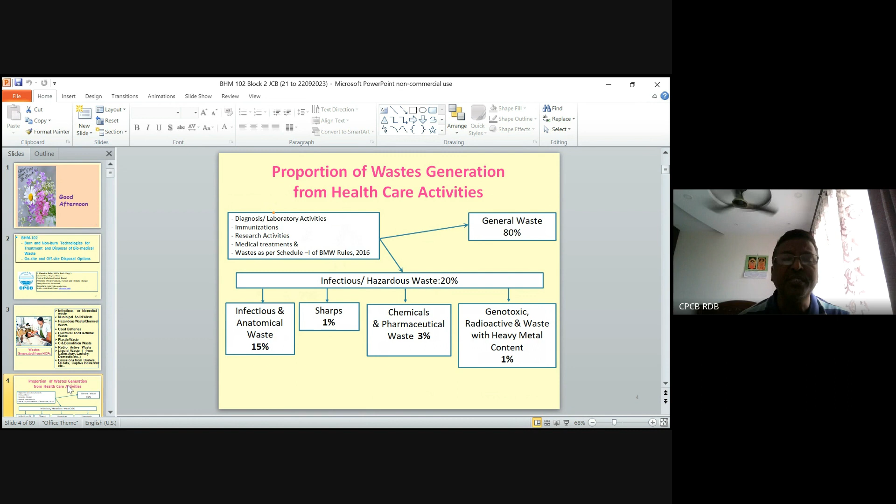In the last class we discussed what type of waste are generated from the hospitals. Generally about 80 percentage of waste is general, non-infectious and non-hazardous, and 20% is hazardous waste. Out of that, infectious and anatomical waste is about 15 percentage, sharps about 1 percentage, other hazardous waste about 3 percentage, and radioactive, burn waste and so on. For the hospital, this is the waste you are concerned about.

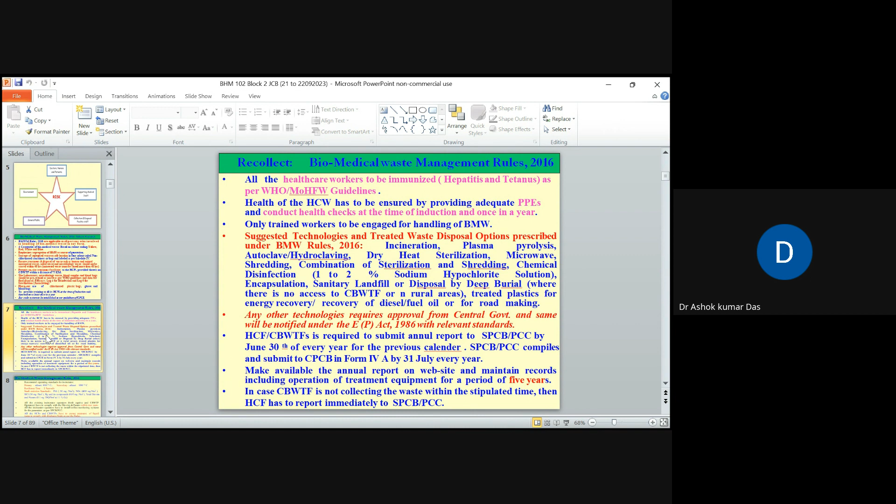Healthcare facilities have to submit the annual report to the State Pollution Control Board by 30th June of every year, as per the prescribed format, Form 4, for the previous calendar year. It is a must.

Make the annual report available on the website in case of all bedded hospitals. At least 30 and more bedded hospitals have to have their own websites. All bedded hospitals should have their own website, and they have to upload all information related to the annual report and other related matters. Records have to be maintained for at least a period of 5 years.

It is a must: in case CBWTF is not collecting the waste within the stipulated time period, maximum 48 hours, the healthcare facility has to report immediately to the State Pollution Board. If the CBWTF is not in a position to take waste from the hospital, you have to inform the State Board of the reason why. Therefore, you are not allowed storage of more than 48 hours of generated waste, especially untreated infectious waste.

All existing incinerator operators have to comply with the dioxin and furans limits within 2 years; 2018 is already the deadline. They are required to comply with the dioxin and furans parameter in stack emissions. The limit given is 0.1 nanogram toxic equivalent per normal meter cube, whereas in case of mercury in stack emissions it is about 0.05 milligram per normal meter cube.

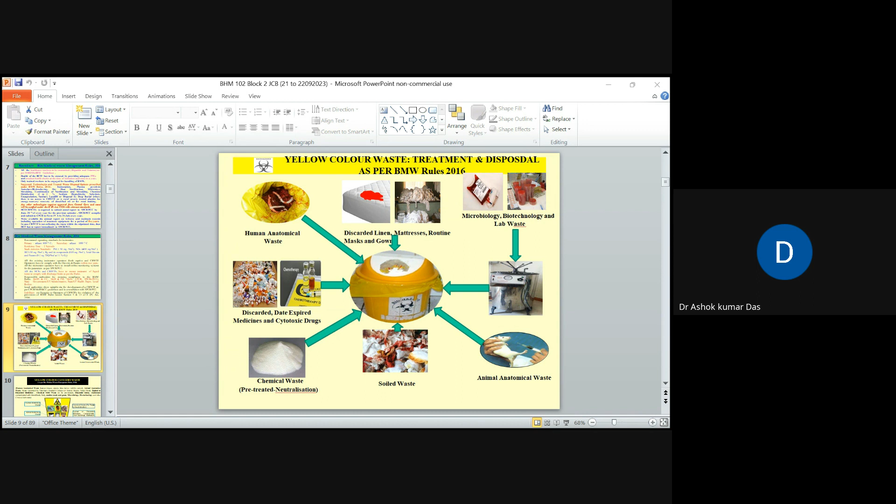We have also seen cytotoxic waste. This is how the yellow color waste has to go into the yellow color bin and bag: it has to be placed into the yellow color bin, like human anatomical waste, animal anatomical waste, soiled waste, blood samples, and blood bags. These samples have to be treated, pre-treated, then go into the yellow bag. Similarly, chemical waste has to be pre-treated by neutralization, and then it can also go into the yellow bag. Expired or discarded medicine waste is to go into the yellow color bag only, except cytotoxic drugs.

Cytotoxic drugs will go separately into a yellow color bag only, but the symbol will not be the biohazard symbol, it will be a cytotoxic 'C' waste symbol. Similarly, microbiology, biotechnology, and clinical laboratory waste has to be pre-treated, and all this waste has to go into the yellow bag only. As I told you, cytotoxic drugs have to go into the yellow color bag, but the label should be a 'C' label, C for cytotoxic.

Red color waste, all plastics, will go into the red color bag or container, but before it goes into the bag or container, it has to be mutilated in order to avoid reuse. All needles and syringes, waste sharps, will go into the translucent container. It should be puncture proof, leak proof, and tamper proof, and only that container should be used for storage of waste sharps.

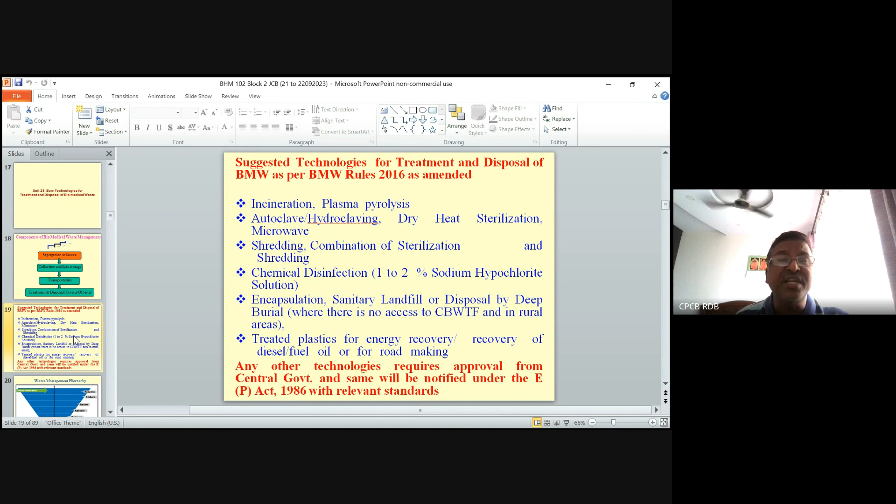The treated stainless steel waste, such as waste sharps which are generally stainless steel, is also recyclable. Stainless steel manufacturers take that waste and recycle it to manufacture different products.

The earlier speaker may have told you how to prevent waste generation as part of the healthcare facility. I don't know whether he has taught this or not, but measures have to be taken by the hospital such that they lead to reduced waste generation, so that we can minimize waste generation in the hospital.

Secondly, if waste generation cannot be avoided, then reduce, reuse, recycle, recover - the 4 R's - has to be done. Reduction can be done by taking certain steps.

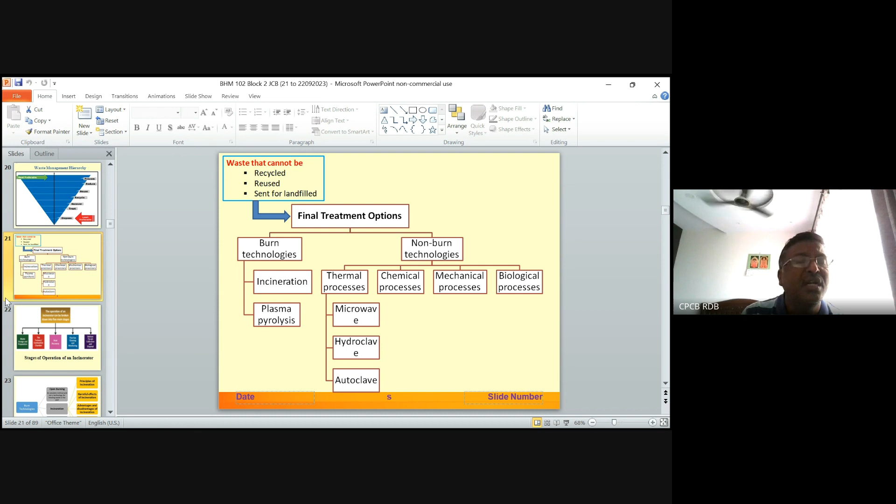The thermal process includes autoclave, hydroclave, and microwave, whereas chemical process means we can use chemical disinfectant. Mechanical process means shredding or combination of shredding and disinfection, or biological processes are also technologies available for us. Let us see what these technologies are.

For treatment of waste by the technique called incineration, the waste has to be prepared. Whatever waste comes from the hospital to the treatment facility will be in color coded bags or containers. First, they have to segregate all the waste depending upon the color coded container. They should not tamper with any bag.

They are not supposed to do that. They cannot remove the tag and they cannot re-segregate the waste at this stage. Segregation should happen only at the source of generation.

Then they separate out all the bags depending upon the color coding. Afterwards, the waste is fed into the incineration. In the incineration process, some heat is generated. Generally, in biomedical waste incineration, heat recovery is not seen anywhere.

Only at one place, somewhere in Srinagar or Jammu I think, I have seen a facility going for heat recovery just to maintain desired temperature, because it is a very cold place. They are generating steam in the process of incineration and circulating that steam into the incineration so that they can maintain adequate temperature, since during winter in a cold place it is very difficult otherwise. The heat recovery they do, they try to recirculate into the system in the incineration process, which is really useful for maintaining the desired temperature.

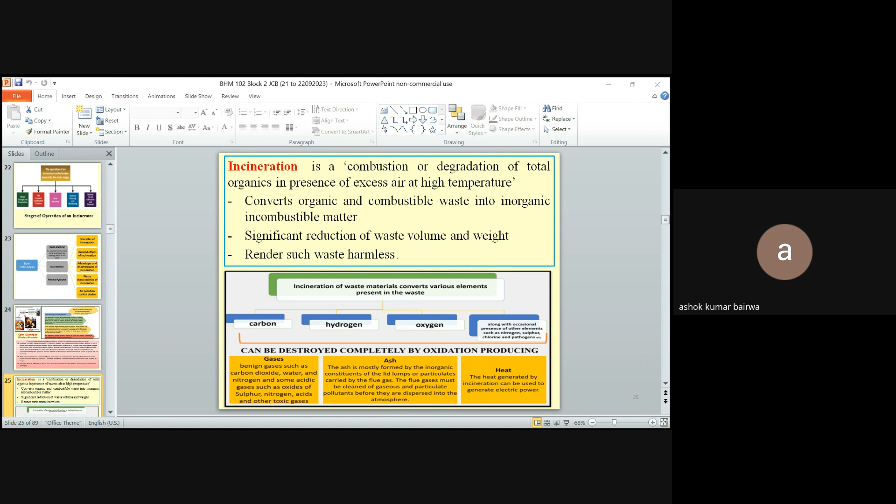Okay, now we are in the burn technologies, non-burn. I just started only, I just covered what was discussed last week. I just started 2-3 slides only, you can catch up from here.

Because of incineration, we also can convert waste. The waste becomes infectious waste turns harmless - it is not already harmless waste, we are converting harmful waste into harmless waste. That's why we go for the incineration process.

As you all know, carbon and hydrogen are matter. Any waste contains this matter - even if you take human tissues, they are comprised of nothing but carbon and hydrogen. Therefore, in presence of carbon and hydrogen, with excess air, this can be converted into carbon dioxide.

In presence of oxygen, if combustion is proper, there should not be carbon monoxide - carbon should be converted into carbon dioxide, and hydrogen should convert into moisture or water, but it remains in vapor form due to the temperature. Therefore, gases are generated, ash is generated, and heat is also generated in the process of incineration of waste.

Now, what is incineration? Just try to understand, this is the simple principle, simple chemistry. I'm not going to give detailed chemistry, it is simple chemistry.

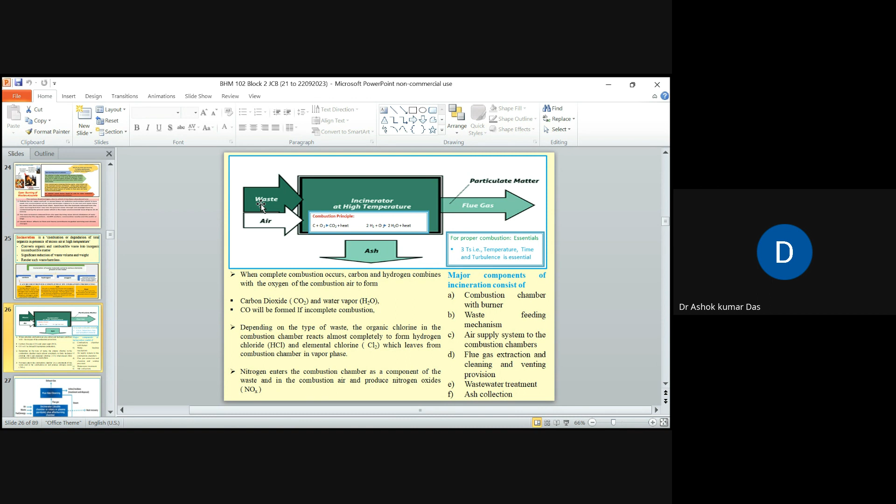This is the waste, whatever is generated. Can you see my arrow, whatever I'm showing? Yes sir, we can see. This is the combustion chamber, and here we are feeding the waste.

In order to combust or incinerate the waste, we require air, oxygen is required, so we are supplying the air also. Waste is nothing but carbon plus hydrogen, let us say. Air means oxygen. Then we are using additional fuel, because waste having high moisture content cannot be burned directly on its own.

Therefore, we have to add some fuel, as well as fire should be given. There will be a jet of fire inside the incinerator. Now, after waste is fed, when the desired temperature is maintained by supplying air as well as auxiliary fuel in the form of fire, the carbon, in presence of oxygen, converts into carbon dioxide and heat is generated.

Carbon in presence of oxygen converts into CO2 and heat is also generated. Now, if combustion is not proper, suppose oxygen required for combustion is not adequate, or if simple oxygen is given without stoichiometric requirement, then carbon, because of lack of oxygen content and inadequate temperature, may not be converted into carbon dioxide. It may instead be converted into carbon monoxide. Then, if carbon dioxide is not generated, it is called incomplete combustion.

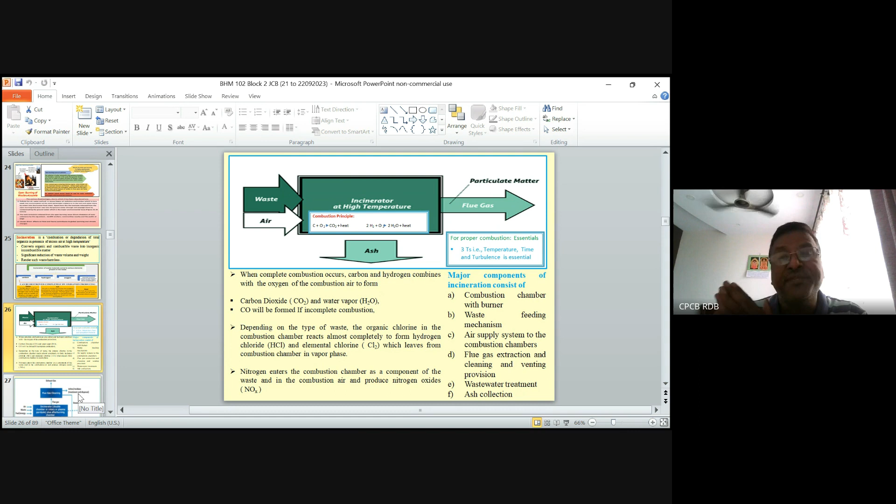Therefore, depending upon the type of waste, the emissions also will be there. If there is mixed waste along with hazardous waste, then emissions will also have hazardous components, hazardous pollutants will definitely be there. Simple example: if mercury spill is not collected and becomes part of medical waste going for incineration, then definitely we can estimate that there will be mercury emissions in the flue gas.

Now, what is the simple system? This is waste. Whatever I want to go for the combustion chamber, I am trying to throw it in. I am supplying air because air is required for the purpose - like we require air, combustion also requires air, so that waste is combusted or burnt easily. And fuel is required, because waste will not have adequate calorific value for burning on its own. Therefore auxiliary fuel is required, and with this fuel, the waste is burnt here.

The process generates flue gas that goes up into the atmosphere. Therefore, before discharge into the atmosphere, there should be a flue gas cleaning system. In the process of cleaning the flue gas, we generate some solids in the form of residue, in the form of semi-solid waste - semi-solid meaning a mixture of water, moisture, as well as solids.

Semi-solid form will be there, slurry form will be there, and flue gas cleaning system, whatever the wastewater is generated from the flue gas cleaning system or air pollution control systems, that has to go for treatment. This wastewater from the APCD, air pollution control systems, has to be treated here.

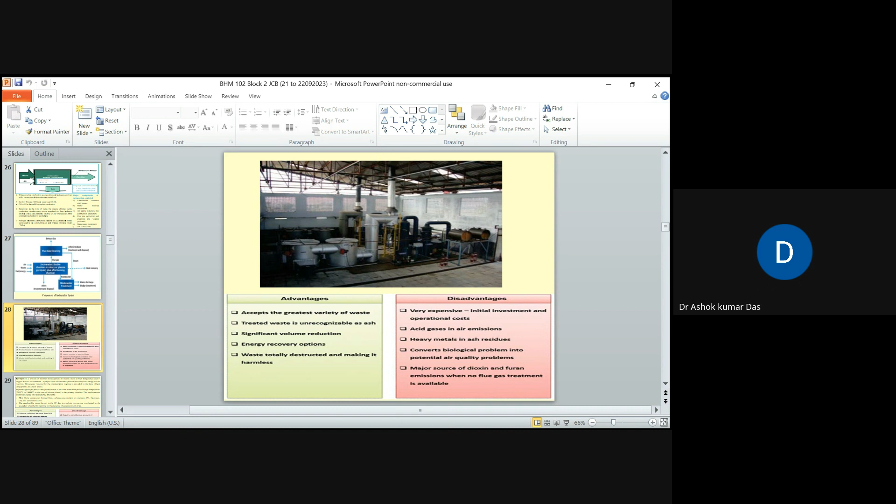Any doubt, please? Any doubt? Okay, sir. Okay. Okay, sir. If you feel any doubt, you can stop me at that point so that you can discuss. No problem.

Advantages and disadvantages are, I think, these are very difficult to read. It accepts the greatest variety of waste. We can take more quantum of waste and treat it easily. Treated waste is unrecognizable as ash. Significant volume reduction is there. Energy recovery is possible, but energy recovery generally does not happen in biomedical waste incineration process. The waste is totally destructed and made harmless.

Disadvantages are: it's a very expensive process, you have to bear the cost. At least you have to bear rupees 30 per kg. Cost of treatment of incineration is around 25 to 30 rupees per kg of waste. Therefore, waste cannot be generated as you wish. You have to minimize the waste generation so that you can minimize the cost of treatment, and also you can minimize the discharges into the emissions, into the environment. You can minimize the impact into the environment.

Generally, the gases generated from incineration are acidic in nature. Because why? Hydrogen plus chlorine reacts with each other in the combustion process and they become hydrochloric acid. Therefore, the gases will be hydrochloric acid. The gas is highly acidic in nature.

Generally, these equipments will get corroded very quickly because they are acidic in nature. Heavy metals will be there depending upon the type of waste, and heavy metals also become a part of ash.

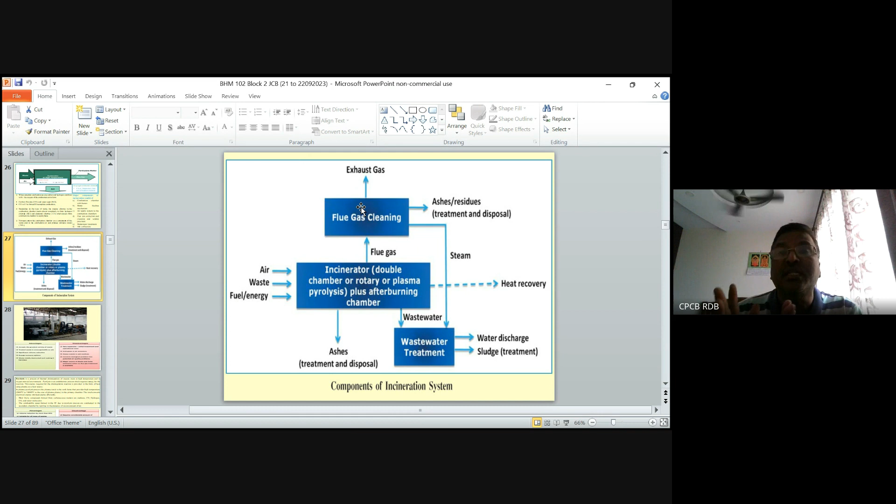Otherwise, the toxic constituents are going to be regenerated, like dioxin furans will regenerate in the APCD also. If you are not reducing the temperature from 1100 degrees centigrade to in between 250 to 400 degrees centigrade, then the reformation of these dioxin furans will take place. That is what we call de novo synthesis.

That means reduction of temperature of flue gas coming from the secondary chamber to the APCD has to be reduced drastically, in a fraction of seconds. Otherwise, dioxin furans will form. Therefore, it is going to cause problems to the environment.

Now, pyrolysis. Both incineration and pyrolysis are one and the same. Whereas in case of incineration, uncontrolled air is there, in case of pyrolysis, whatever air is required for the purpose of combustion is supplied in lesser quantity, that is lesser than the stoichiometric requirement.

For the purpose of combustion, we can estimate the oxygen requirement depending upon the calorific value of the waste. Then I try to control the oxygen supply into the chamber in order to make the waste into a harmless compound. Therefore, this process is under controlled conditions, or starved conditions. Under starved conditions, waste can be burned. That process is called pyrolysis.

Therefore, in the process of pyrolysis, generally the gases generated are methane, carbon monoxide, hydrogen, carbon dioxide, and water molecules. The combustible gases formed in the primary chamber due to pyrolysis are combusted in the secondary chamber. It is one and the same, except here, rather than supplying the requisite quantum of oxygen, we are supplying oxygen lesser than what is required as per the stoichiometric requirement.

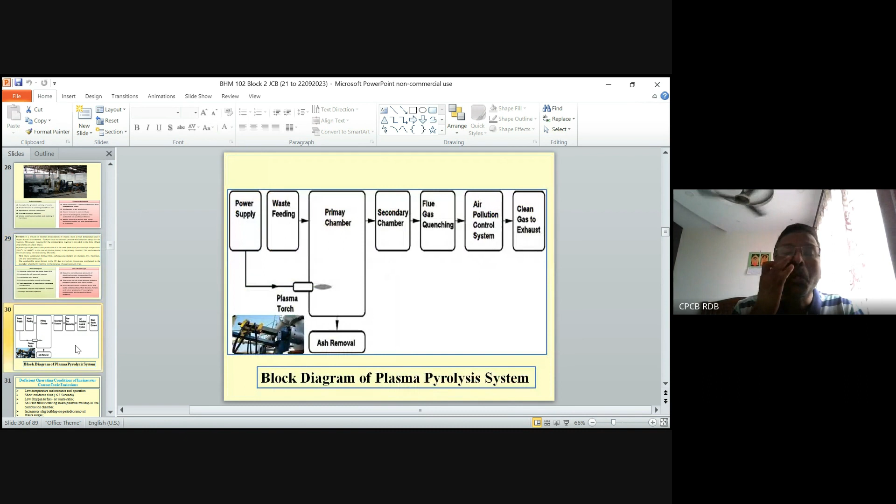Now, what are these stages once more? Plasma pyrolysis and incineration, let's go through it again.

Incineration and plasma pyrolysis are one and the same process. It will have two chambers. In the primary chamber, waste is converted into carbon monoxide: carbon plus oxygen gives carbon monoxide, and this carbon monoxide goes to the secondary chamber, where in presence of oxygen and high temperature, carbon monoxide is converted into carbon dioxide.

Whereas in case of pyrolysis, the primary chamber's oxygen supply will be lesser than the stoichiometric requirement. Whatever oxygen is required, we are not going to supply that much; we supply less than required, and waste is converted into harmless compounds through the secondary chamber.

Plasma pyrolysis is where we supply oxygen in lesser quantity than the stoichiometric requirement, whereas incineration is also a combustion process. Only in pyrolysis you don't give adequate air supply; you give controlled air lesser than required, ensuring the waste is treated and converted into ash easily.

Now coming to this: here is a plasma torch, which is generated. There we are using the burner. Here this is a plasma torch, and the high temperature is generated because of the plasma torch.

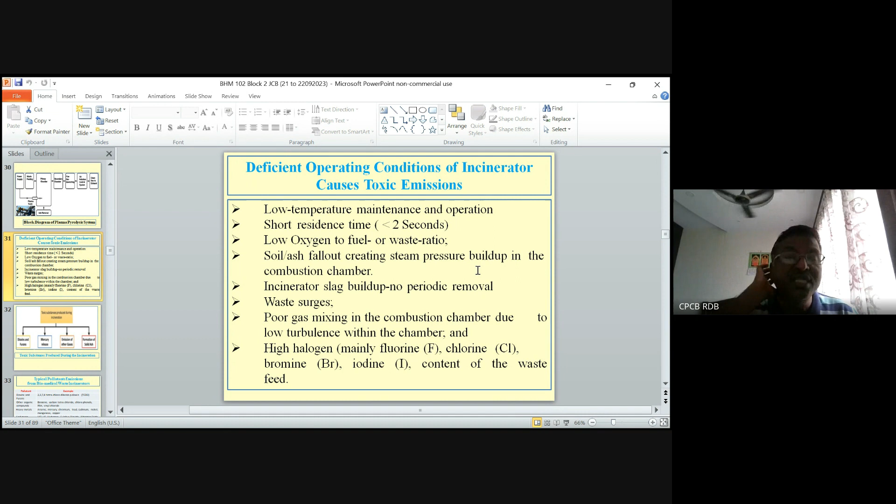Poor gas mixing in the combustion chamber: if adequate mixing is not there, if circulation of air is not proper within the combustion chamber, that causes toxic emissions into the atmosphere. High halogen content, meaning mainly fluorine, chlorine, bromine, and iodine, if present, definitely causes toxic emissions into the atmosphere.

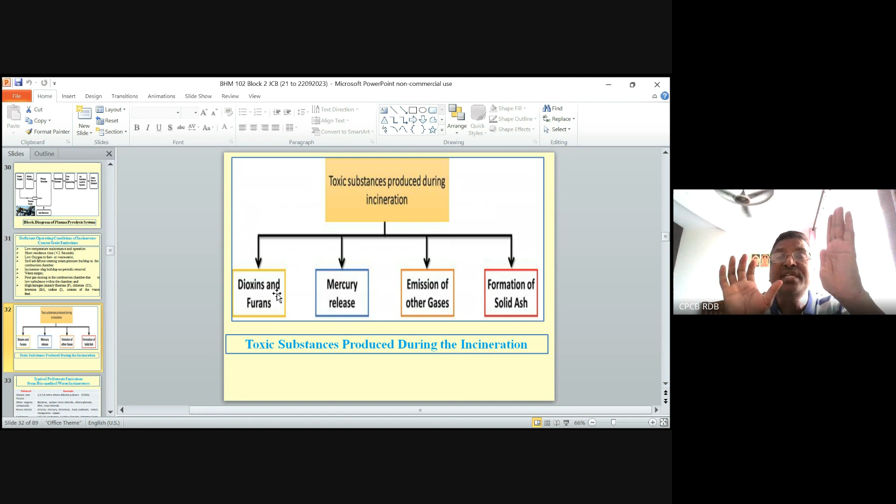These are the toxic emissions we can expect, like dioxin furans. As I mentioned with de novo synthesis, if I don't reduce high temperature flue gases emanating from the secondary chamber in a fraction of a second, then these dioxin furans will be generated as part of the APCD. They will be regenerated in the air pollution control device itself, because if you don't reduce the high temperature flue gas from 1100 down to the range of 250 to 450, reformation of dioxin furans will take place in the air pollution control device itself.

Suppose mercury is present as part of the waste, then mercury will definitely be part of the flue gas. Emissions of other gases will be there because of incomplete combustion, and toxic constituents will also be present as part of the ash. So these are the types of gas pollutants that can be expected from biomedical waste incinerators: dioxin furans, organic compounds, heavy metals, acid gases, carbon monoxide, particulate matter, bottom ash, and residues.

Depending upon the type of waste, if you don't maintain the desired temperature and desired residence time or turbulence, you can expect these problems. And if your control systems are not proper, if your air pollution control devices are not proper, the flue gas will definitely have these parameters. These pollutants will become part of the environment. These are the disadvantages in the process of incineration.

Now, impact of toxic emissions from incinerators: they contribute to global climate change, and they also cause acid rain because the emissions are generally acidic in nature. Therefore it causes acid rain. In preliminary stages wherever there is air pollution, in the preliminary stages of rain, generally it will have acid content.

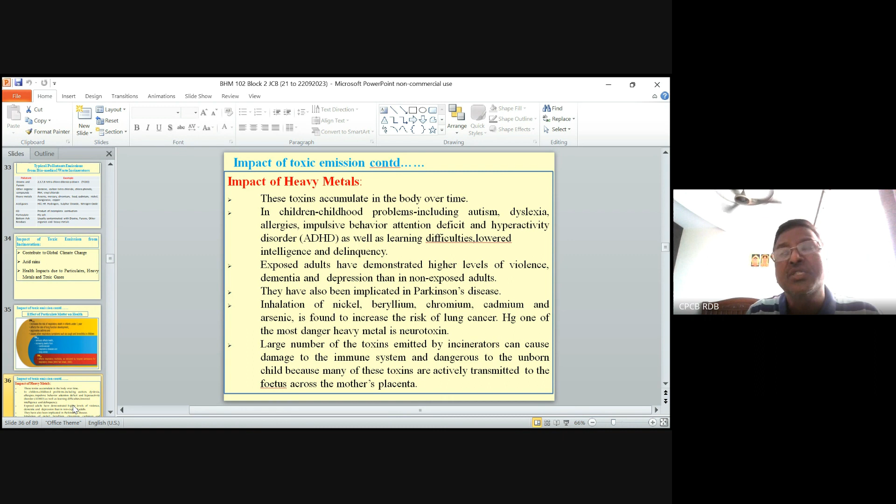Mercury definitely comes into the food chain. Similarly, if ash is not properly disposed of, it contains heavy metals and may cause impact on the soil or land because of the leachate, causing other problems. Depending upon the type of heavy metals, it causes different types of problems if exposed to such things.

Gases also cause impact on the respiratory and cardiovascular systems, and also cause skin and eyes and lungs problems. Eye irritation will be there, skin irritation will be there when there are toxic gases. Side effects such as cough, nausea, and vomiting will be there because of the health impacts of toxic gases.

Incineration - what type of waste can be input? The basic characteristics necessary for incineration include the waste should have a calorific value of 2000.

Can anybody tell me, if waste is not having 2000 kilocalorie per kg calorific value, what will happen? Suppose if waste is not having correct calorific value, what will happen? Not known, sir.

Suppose if waste is not having adequate calorific value - that means waste should be able to burn on its own. If there is a fire, it should burn on its own, that means it has got high calorific value. Paper will have high calorific value, for example petrol will have high calorific value. If there is moisture, then we have to require more and more fuel, we have to give more fuel, then only it can be burnt. Otherwise it can't burn, therefore this is the problem.

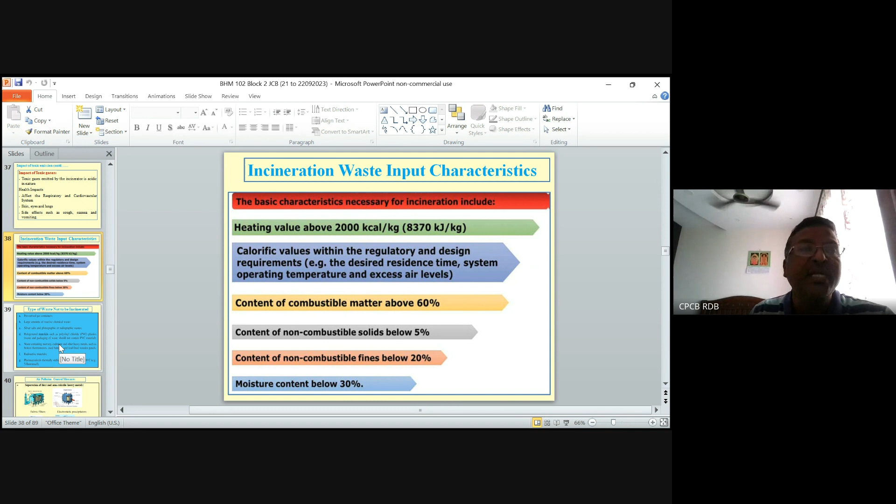If more fuel is consumed, the cost of treatment will go up, and naturally the emissions also will go up. Therefore we have to reduce the cost of treatment and minimize impact on the environment by control measures, which also adds cost. Type of waste not to be incinerated.

Waste like pressurized gas cylinders, large amounts of reactive chemical waste, silver salts and photographic chemicals, halogenated materials such as polyvinyl chloride plastics cannot be incinerated. Otherwise they are going to cause dioxins and furans to be emitted.

Waste containing mercury, cadmium, and other heavy metals such as broken thermometers, used batteries, lead-lined wooden panels should not be incinerated at all. Otherwise it is going to cause mercury, cadmium, and heavy metal emissions as part of incineration. For example, mercury is present in thermometers - if you make it part of the waste, then mercury emissions will be there in the process of incineration. Lead acid batteries definitely will have lead, therefore that also becomes part of the ash content. This sort of waste should not be incinerated at all.

Radioactive waste also should not be incinerated. Pharmaceutical waste that is thermally stable below 120 centigrade has to be incinerated only at this temperature, otherwise it is going to cause problems.

What type of APCD should be there? These are the APCD - the flue gas should have a system like fabric filters. We use the filters, it is mechanical equipment, not like general equipment. Flue gases come through this filter so that all the gases or particulates are controlled, and the gases free from particulates are discharged into the atmosphere through the stack.

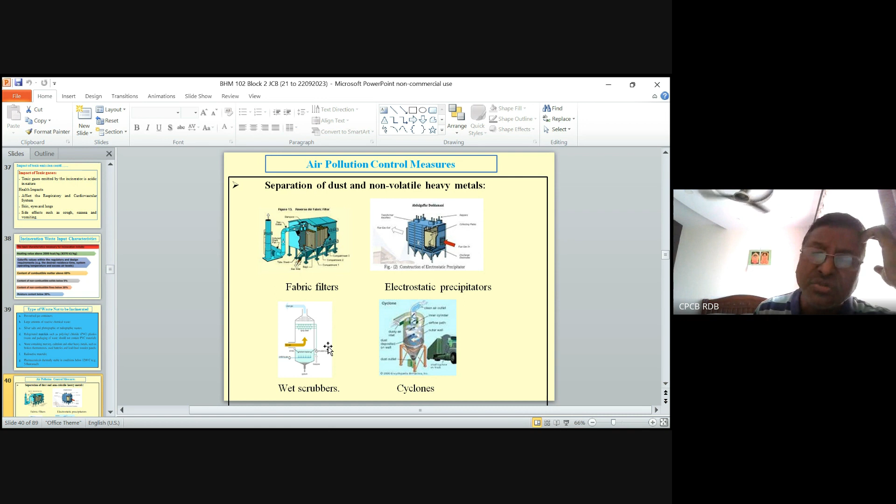There are some wet scrubbers. As I told you, the flue gas is generally acidic in nature, so in order to neutralize it, alkali is sprayed over it. Gases are sent through this from the bottom, whereas from the top, the alkali solution to neutralize the acid is sent - caustic soda is sent, or lime solution is sent. Therefore we can neutralize these acidic gases.

Then it will go to other APC, air pollution control devices - wet scrubbers, that is what we call wet scrubbers, and cyclones. In cyclones, by means of cyclonic effect, the gases will go into a subtler form in the process, and they lose velocity and energy.

In the centrifugal equipment, because of centrifugal force, the higher particulates fall on their own to the bottom. It is a physical phenomenon only, mechanical equipment. Therefore, this is one of the equipment used for the purpose of control of particulates.

Now, how to control acids - acid content, hydrogen fluoride, sulfur dioxide, mercury, and other things. We have a system called the Venturi scrubber. Gases go through this from top, and along with this, an alkali scrubber is given. When passing through, the gas is scrubbed and cleaned. The clean gas goes from the bottom for further treatment.

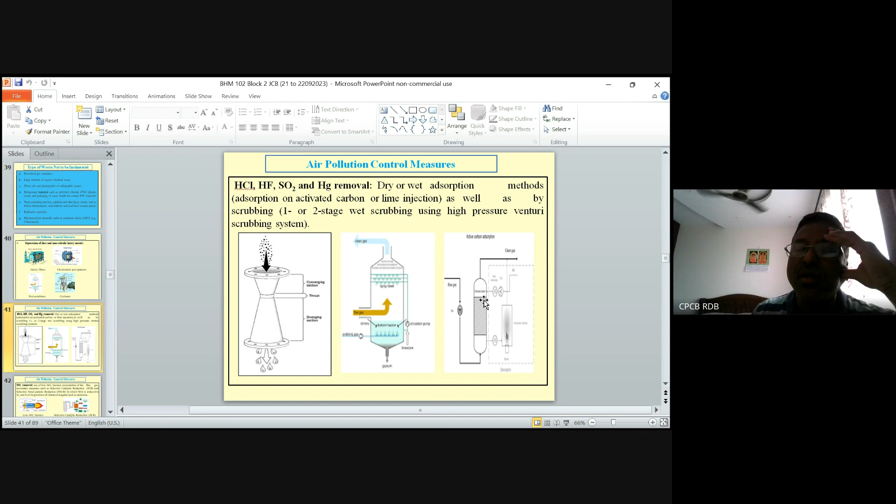Here also, the scrubber is a wet scrubber, as I already told you. An alkali solution is added to neutralize the acid gases. Also, one type of APCD is called adsorbents - activated carbon or activated lime is used when gases pass through this way. All heavy metals, including mercury or dioxins and furans, can be retained here, and the gases free from pollutants can go through and finally discharge into the atmosphere.

These are some of the techniques. I can't tell you everything, but it's a very huge subject. Incineration itself is a very huge subject.

How to remove the NOx? We have to use proper burners - these are called low NOx burners. Oxygen or nitrogen will not be there, low nitrogen will be there. Therefore, in the process when you supply air along with these burners, the nitrogen content will be very low in the supply of air itself. It controls the NOx generated from the combustion process so that it will be very less.

Also, we use ammonia as a catalyst to reduce various pollutants. This is called selective catalytic reduction, where ammonia is used to remove NOx. The NOx is converted into nitrogen and water or moisture by using ammonia as a catalyst in the process of selective catalytic reduction - SCR. We call it SCR.

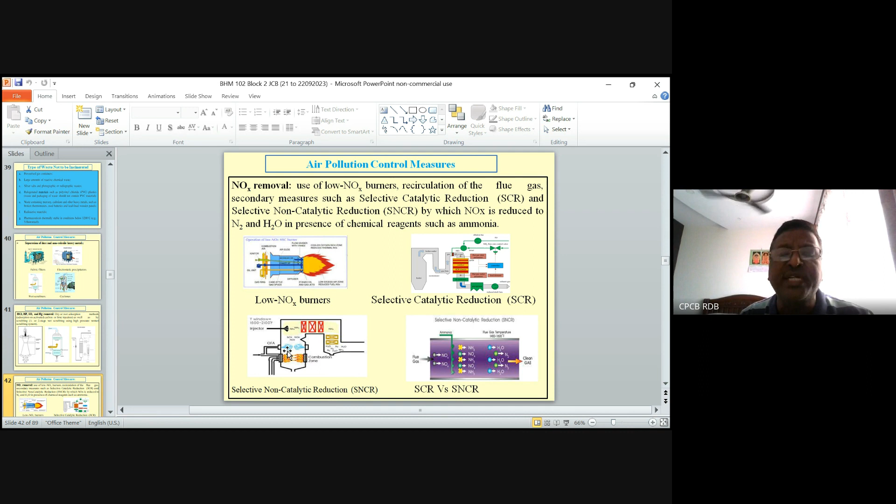Whereas in case of SNCR, selective non-catalytic reduction, only temperature will take care of it. High temperature is maintained and all the gases are converted into harmless gases and it is not going to cause anything. Therefore, these are the techniques adopted for the purpose of control of flue gases.

And reduction of organic matter emissions. Primary measures include limitation of de novo synthesis - by adopting this, we can control the dioxin and furan emissions into the atmosphere.

We have to maintain optimized conditions, meaning temperature, residence time, and turbulence. These three T's - temperature, time and turbulence - if maintained properly, can minimize the formation of PCDD, meaning polychlorinated dibenzodioxins, and PCDF, meaning polychlorinated dibenzofurans.

These are carcinogenic in nature, highly toxic. In the process of combustion, PCDD and PCDF, dioxins and furans, are generated. Therefore, to minimize these organic emissions and furans, you take measures like maintaining optimized conditions, and the flue gas emanating from the secondary chamber has to be reduced in temperature to between 250 to 450 in a fraction of seconds, so that these furans will not be formed.

Secondary measures like dust separation - we use cyclones, filters, everything can be used, and also active carbon filters. Apart from the injection of active carbon into the flue gas systems, that also absorbs the toxic emissions present in the atmosphere. This is about incineration and how to reduce this toxicity.

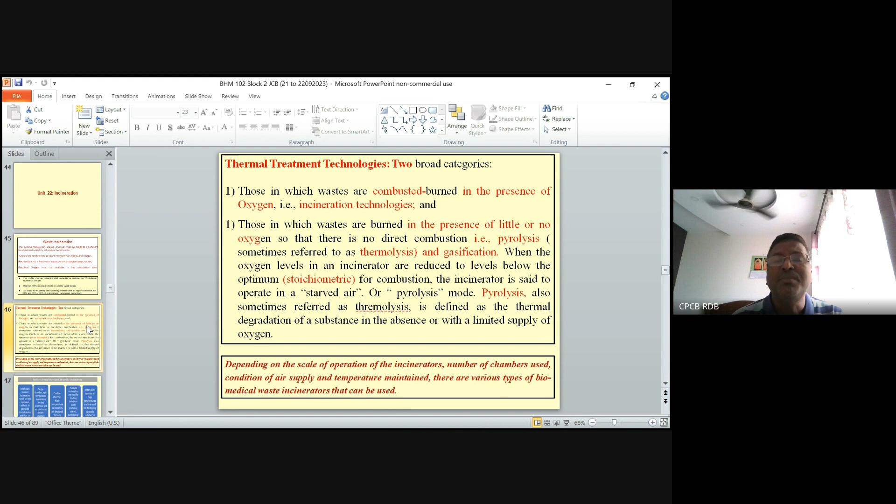So there are two types of incineration. One is conventional incineration where adequate oxygen is given, especially in the secondary chamber we give more supply than what is required. But in case of pyrolysis, the air supply rate in the primary chamber is given very less than what is required in order to combust all the waste. These are the two types.

What are the other types of incinerators? The incinerators are generally categorized into four types: small scale low cost incinerators, single chamber incinerators, double chamber incinerators, pyrolytic incinerators, and finally one more called rotary.

Now what are these single chamber incinerators? If a single chamber incinerator is there, this is the single chamber incinerator without any air pollution control. That means a simple box, not open burning, but controlled burning where he is adding waste and fuel, and one pipe he has kept. It is a single chamber incinerator, but he is maintaining desired temperature, like a lamp.

If you see here, this is a single chamber incinerator. It has got one chamber for waste feeding. This is also a single chamber incinerator only, it has got a burner and a stack pipe through which waste gases go, but it is not a double chamber incinerator.

Why is a single chamber incinerator not at all suggested for incineration? Can you guess now, based on the chemistry of combustion you've heard? If you adopt a single chamber incinerator, what will happen?

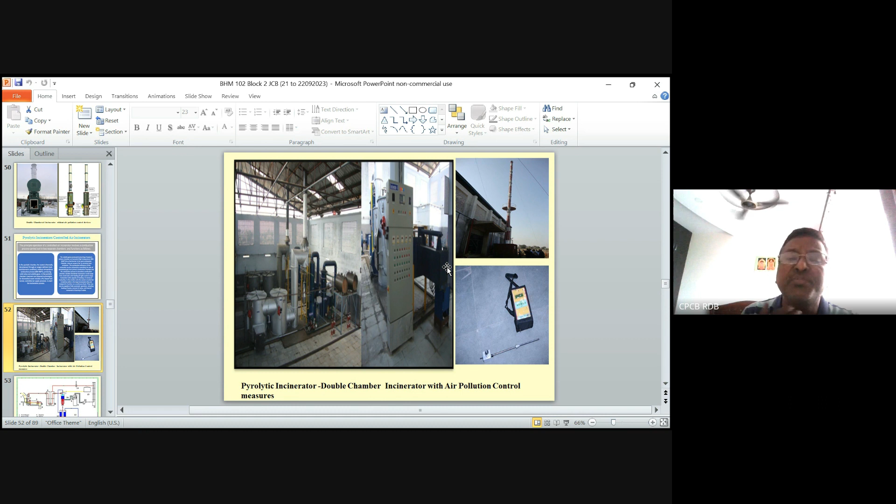These are the automatic control systems. They record the temperature and pressures, and are also connected to a printer. The printer gives directly what temperature is maintained over a period of certain seconds. This is in general, this is the overall scenario. Just to show you diagrammatically.

This is actually a rotary kiln. In place of a rotary kiln, it is also a conventional pyrolytic incinerator, but here, in place of a primary chamber, I will have a rotor, like a drum. It will be rotating. The waste I feed will go into the rotor where it rotates, rolling like a cement mortar mixture or concrete mixture.

The waste is fed, and by the time the waste travels from here to that side, at the end of this point, all the waste will be converted into CO2. The length of the drum will decide how much waste is converted into CO or CO2.

It's the length of travel all the way from here to this place. There's a slight slant for this drum, so by the time the waste reaches from here to this place, all of it will be converted, especially since a burner is also present. Generally, in the rotary kiln, there's perfect provision to convert within the primary chamber itself, and leftover carbon monoxide is converted to CO2.

Then it is taken to the APCD, the air pollution control devices. Scrubbers are there, bag filters are there. Ultimately, the waste is collected, and finally it goes through the stack, which should be above 30 meters in height above ground level. That is the minimum requirement.

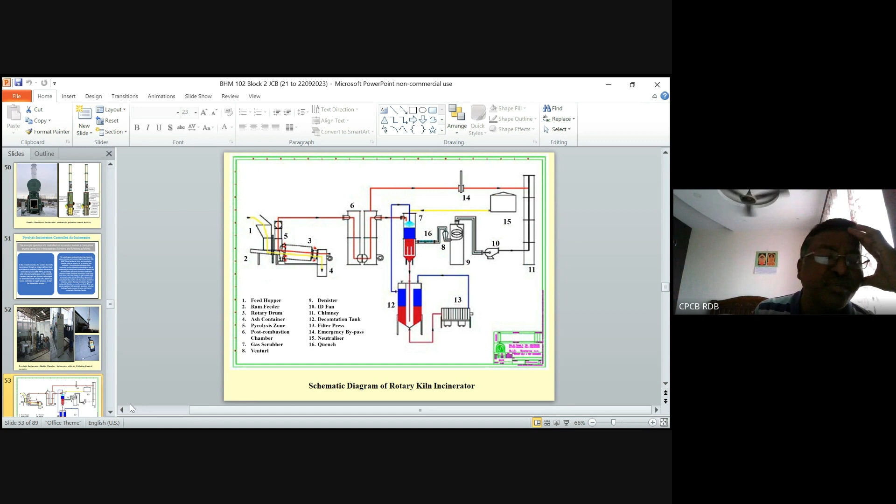Any doubt, please? This is what I am saying. This is the rotor where the waste is fed. From here the waste goes to this end, where the secondary chamber is. Here the waste is converted completely from carbon monoxide, then it goes for air pollution control systems. Finally, I don't see the stack here, but the stack should be there definitely.

Rotary kilns are generally used for treatment of huge quantities of waste. We can operate this equipment 24 hours. If there's any waste, maybe 2 tons per hour, I cannot go for a conventional incinerator with primary and secondary chamber. The rotary is the best one to treat huge quantities of waste, operating 24 hours. So 2 tons per hour means within 24 hours I can treat about 50 tons per day, so I can go up to 50 tons per day.

Wherever waste generation is high, wherever waste has to be treated and disposed of in high quantity, you can go for rotary. Wherever the waste is more than 2 tons per hour, definitely one will prefer to go for rotary. Rotary is the best one for control of emissions also, compared to the conventional two chamber systems. I think this comparison I already covered, so there's no necessity to explain once again.

The temperature to be maintained in the primary chamber is about 800 degrees centigrade. Whereas in the secondary chamber, the temperature to be maintained is 1050 plus or minus 50, meaning 1000 to 1100 degrees centigrade. So the primary chamber you maintain at 800 degrees centigrade, while the secondary chamber is maintained between 1000 to 1100 degrees centigrade. Combustion efficiency.

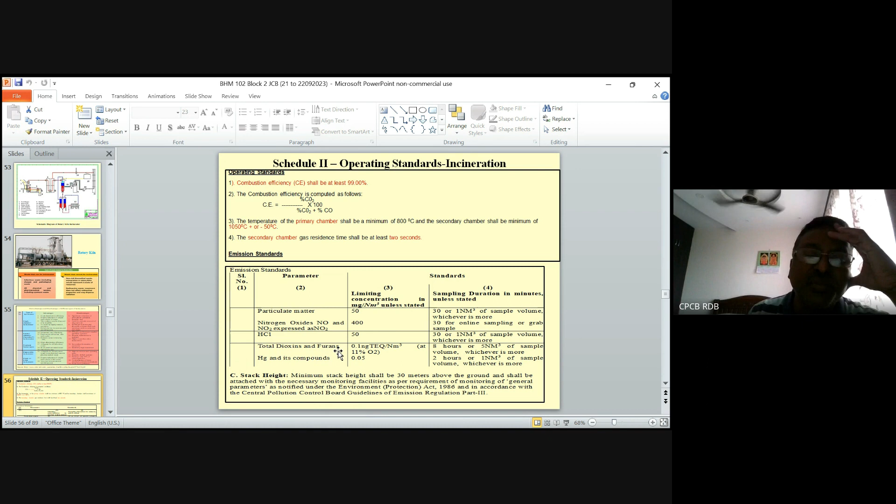The discharge norms for flue gas emissions prescribed under the rules are: particulate matter 50 milligram per normal cube, NOx is 400, acid mist about 50 milligram per normal meter cube, total dioxin furans is 0.1 nanogram toxic equivalent per normal meter cube, and mercury and its compounds should not be more than 0.05. Depending upon the type of waste, the emissions will also vary.

Earlier, thermometers were used, but now thermometers are not in use in most hospitals. Therefore, mercury can generally be complied with from the incineration process. Earlier there were some emissions observed; even I have observed this.

Stack height should be 30 meters. Now, what type of emissions can be expected from medical waste incineration? These include particulate matter, carbon monoxide, dioxin furans, hydrogen chloride, sulfur dioxide, nitrogen oxide, and lead. If lead is there, generally some medicines will have lead, cadmium, and mercury as well. If these are part of the waste and incinerated, these emissions can be expected even from biomedical waste incinerators.

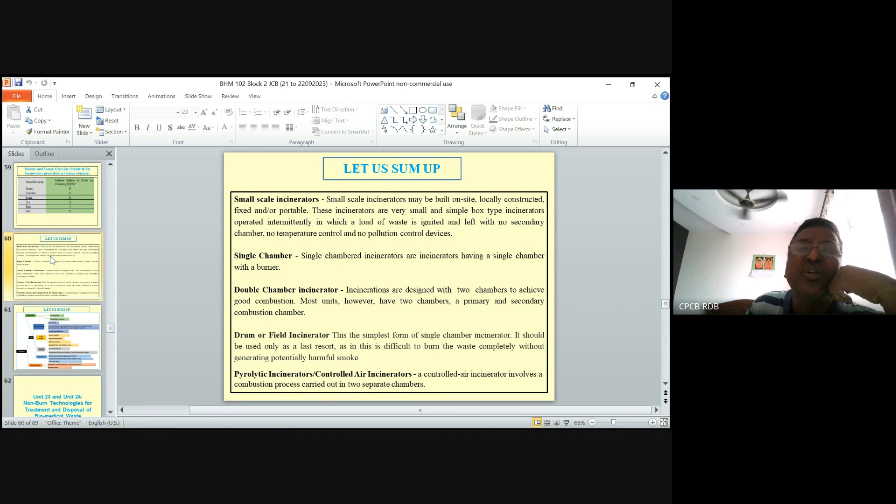Now, just to sum up, incinerators and their types: we have single chamber incinerator, double chamber incinerator, pyrolytic, and rotary kilns.

Waste to energy plants also fall under the purview of incinerators, but biomedical waste generally doesn't go to waste to energy plants. Rotary kiln and pyrolytic incinerators are generally adopted compared to single or double chamber types. Single chamber incinerators cannot be encouraged at all; they are prohibited and not allowed in the country. Double chamber incinerators are also not allowed without APCD, whereas pyrolytic and rotary kilns are allowed as of date. This covers the incinerator process.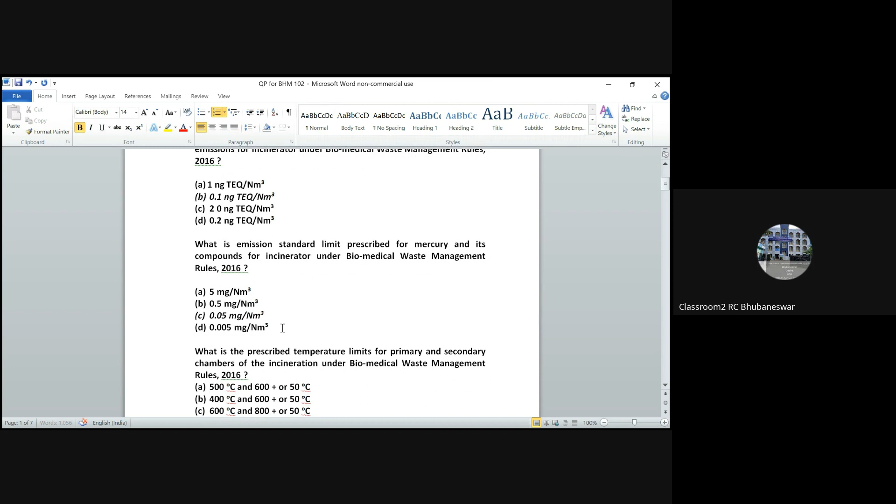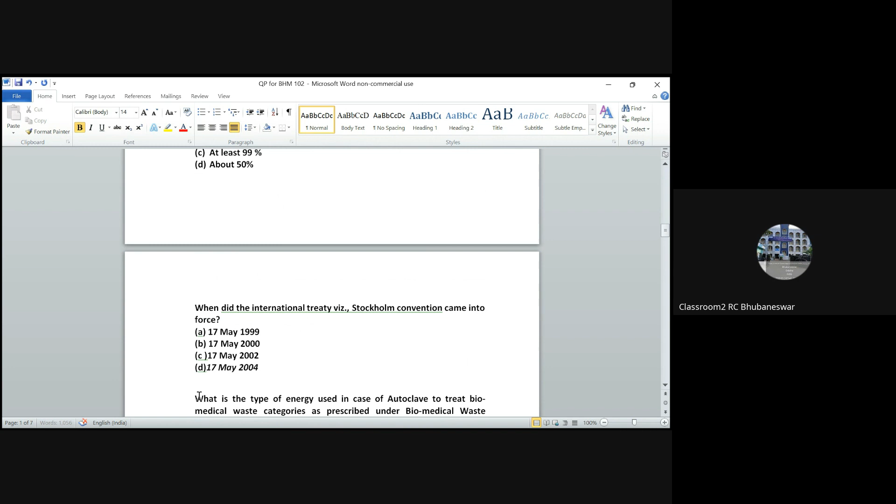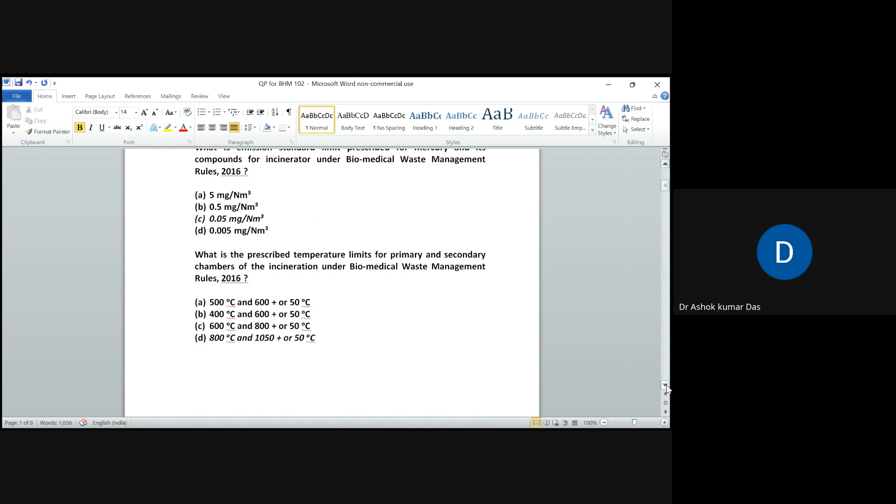What is the emission standard limit prescribed for mercury and its compounds for incinerators under Biomedical Waste Rules 2016? The limit prescribed for mercury and its compounds is 0.05 milligram.

What is the prescribed temperature limit for primary and secondary chambers of incinerators under the BMW rules? What should be the temperature in the primary chamber? 800 degrees Celsius for primary, and 1050 plus or minus 50 for the secondary chamber, meaning 1000 to 1100 degrees centigrade is the limit.

What is the prescribed minimum residence time for the secondary chamber of the incinerator under the BMW rules? What should be the minimum residence time? At least 2 seconds, sir. Very good, at least 2 seconds is the correct answer.

What is the prescribed minimum stack height for incinerators under the BMW rules? 30 meters above ground level is the minimum stack height suggested under the rules.

Biomedical waste to be incinerated shall not be chemically treated, as per BMW rules. Why? First understand the question - why should waste that is going to be incinerated not be chemically treated? For example, a chemical disinfectant like hypochlorite solution - if used for treatment of waste which is going for incineration, it causes dioxin and furans because of chlorine. Disinfectant is chlorine-based, so any waste treated with chlorine that goes for incineration will generate dioxins and furans. Therefore, disinfectant treatment is not allowed - that's the correct reasoning.

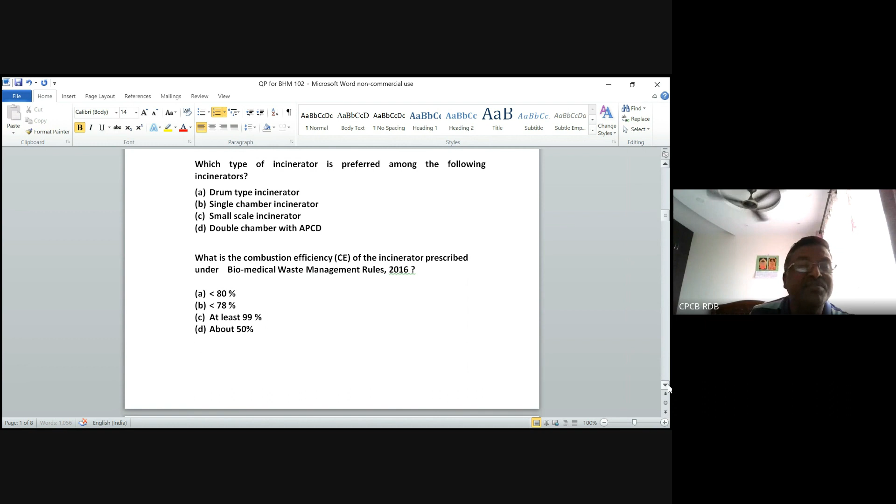These questions are not for this session - for the next one. 17th May 1999? No, 2004, sir - 2004. This is not for this session, it's for the next session on the Stockholm Convention. This is not for us right now.

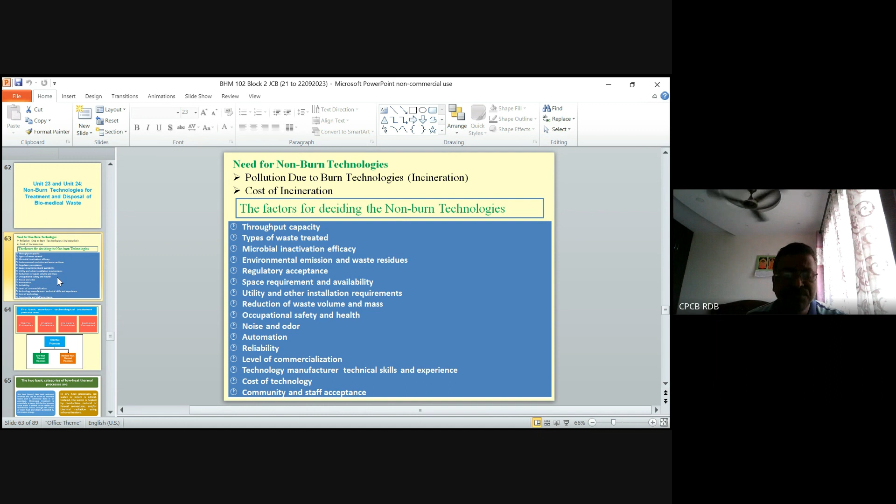But whatever the rules specify, only those technologies have to be used by any operator or generator. Specified technologies have to be used for the purpose of treatment of any biomedical waste.

But if anybody wants to use any technology other than the prescribed one, they have to submit the proposal to the Government of India. They notify the standard operating procedures and standards, then the technology can be adopted by the generator or proponent.

Now, coming to these non-burn technologies, they can be divided into 4 types: thermal processes, chemical processes, irradiative processes, and biological processes. Thermal processes are further divided into low heat thermal processes and medium heat thermal processes.

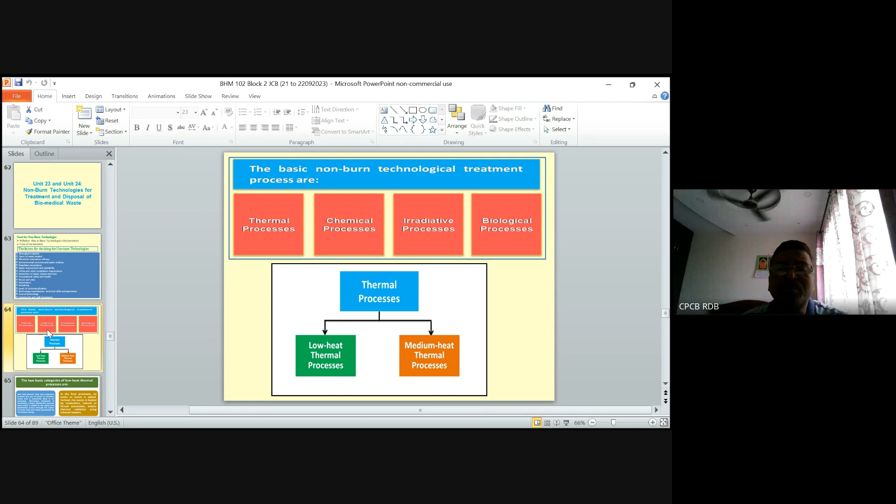What is this low heat process? In low heat, we use steam, hot water or electromagnetic radiation to heat and decontaminate the waste. Here the heating media is steam, hot water, or electromagnetic radiation used as the media for treatment of the waste.

There are two types of waste processes in low heat thermal treatment: wet heat type and dry heat process. In wet heat process, the types are autoclave and autoclave microwave. Similarly, we have dry heat processor also, where dry heat air is used as a media for treatment of waste. This is the difference between the wet heat process and dry heat process.

Any doubt, please? No sir, and I think this is your subject only, I should not teach you people. You are well aware of these facts, and this is only the preliminary basics.

Now, hazards associated with the wet heat process or dry heat processes include: blood splatter may take place, spills may take place, aerosolized pathogens may be present in the atmosphere, exposure to chemicals and hazards, hot surfaces and steam can cause burns, ionizing radiation is a problem, noxious odors come in the process of treatment, and noise pollution is there because of the motors and equipment used.

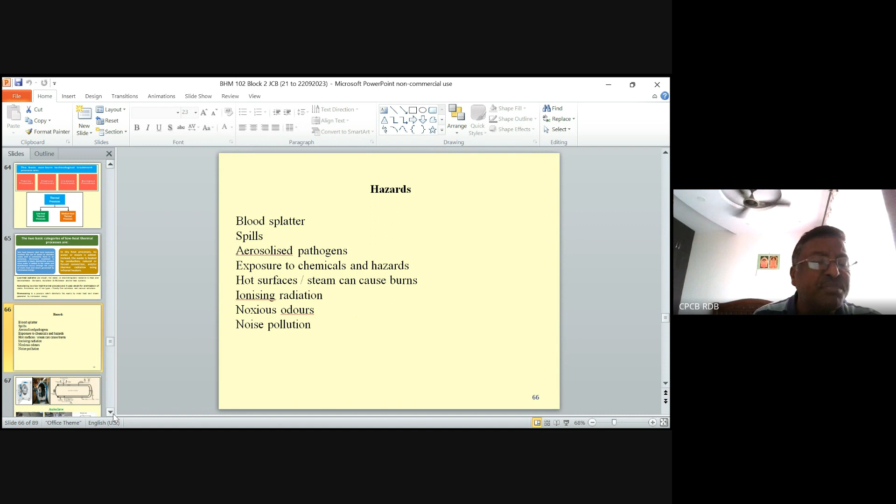Non-burn technology also has some drawbacks. Now let us see what these non-burn technologies are. One is autoclave, a low heat process. I think you are aware of how autoclave works, so there's no necessity for me to explain it.

Autoclave uses steam as the media of heat. There is a front door where we feed the waste using a trolley, and once the waste is fed, it is closed. Then we use temperature and steam to maintain the required condition in the autoclave, monitored by a pressure gauge. Once the equipment is operated for the desired temperature, pressure, and duration, one cycle is over, and the waste is taken out and discarded as treated waste.

Now, what is the difference between autoclave and microwave? In case of autoclave, the media of heat is steam. What about in case of microwave?

Microwave itself is an energy used as the medium of heat to treat the waste. Electrical energy is converted into microwave energy, and that microwave energy treats the waste. It is a simple technique where heat is generated within the mass of the waste because of the presence of moisture, and that is how the temperature is raised. Then the waste is treated in the case of microwave.

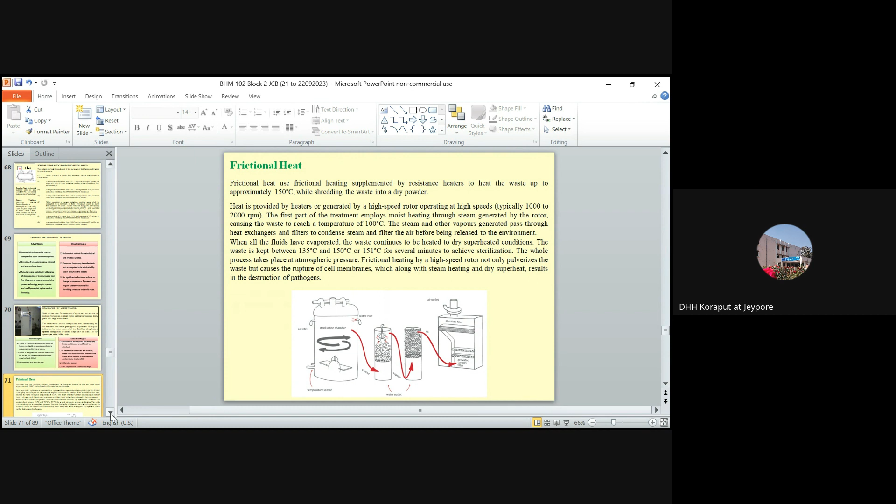Other technologies exist too, like frictional heat. There is a technology called the frictional heat method, but I have not come across this. Has anybody come across this? Even I have not come across it anywhere. Actually, it is not suggested under the rules. IGNOU has come out with this technology, and I am just covering it, but this technology is not suggested under the rules. Therefore, you cannot use this technology.

Now, dry heat sterilization. It is one of the technologies approved by the Government of India and notified under the biomedical waste rules, where dry heat is used as the medium of heat for treatment of biomedical waste. The temperature maintained shall not be less than 185 degrees centigrade. Generally you can maintain a temperature of 180 to 185 degrees centigrade, for a residence period of at least 150 minutes. Because dry heat is used, the duration is longer and temperature is higher, so in order to assess efficacy, you have to use biological indicators, that is Geobacillus stearothermophilus.

You can use it as a spore test at least once every 3 months. You have to conduct this test and maintain routine tests for every batch. You can adopt the strip for routine testing, and records can be maintained. This is one more technology approved under the rules as a normal technology.

Other technologies include chemical processes. You can use disinfectants, like sodium hypochlorite, which is the cheapest. You can use other chemical disinfectants too, but it is cost effective. Ozone can also be used, but it is a costly affair. We can also combine both shredding and the chemical process together as a combination process.

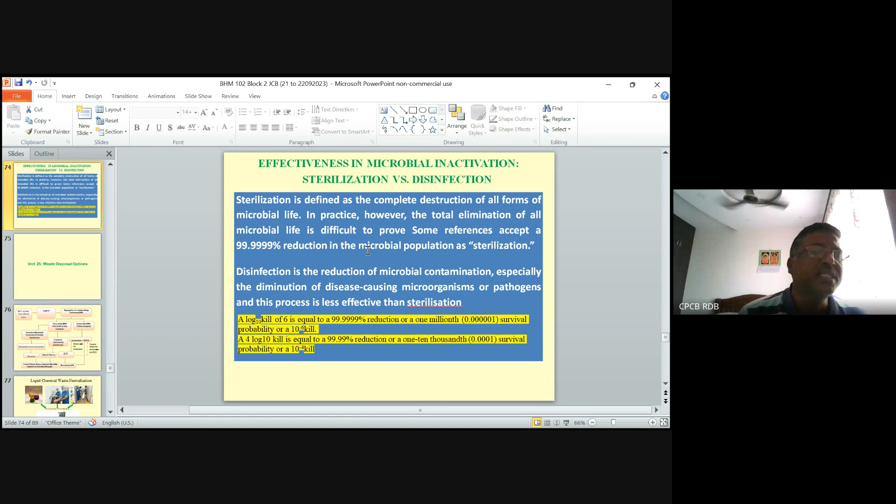As far as effectiveness in the microbial inactivation process, log 6 is the best in order to achieve 99.9999% efficacy, especially in case of autoclave. Whereas if you use chemical disinfectants, you can achieve an efficiency of log 4, which is only 99.99%. This is about the normal technologies. Any doubts, please?

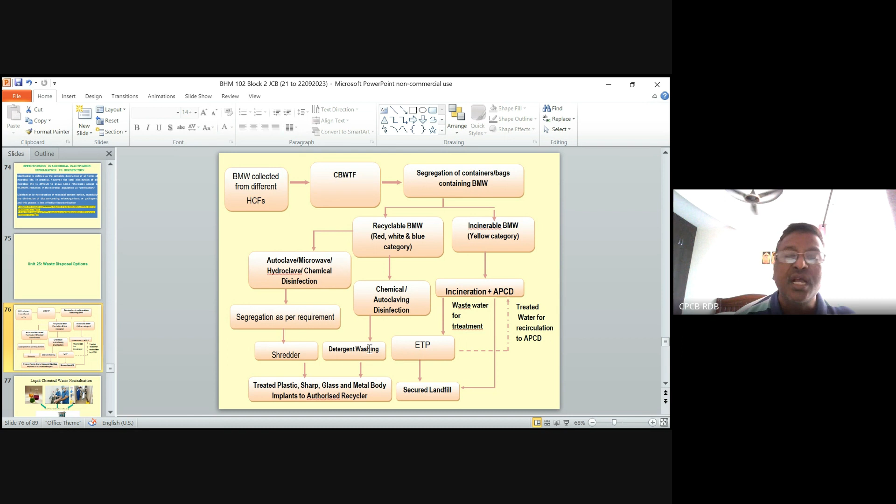Through chemical autoclaving or disinfection, after waste is treated, it has to go for soap washing through detergents. After washing, that treated waste can go for final disposal through recyclers. After treatment only, recycling of waste is permitted - before treatment it is not permitted.

What are the various off-site, on-site treatment options we have to do? That is liquid chemical waste neutralization. This on-site treatment option should be there as a part of the hospitals - what type of treatment is applied for liquid chemical waste that has to be neutralized?

If it is acid in nature, then you have to use alkali solution. If it is alkali in nature, you have to use acid for neutralization. After mixing, once the pH is measured, if the pH levels are within the range prescribed under the rules, then this waste is discharged into the drain or separate drain, which will go for ETP.

One more dosage should be there - one is for acid, one is for alkali. Depending upon the chemical nature of the liquid, automatic dosage will come, decided by the pH measurement. Once there's a mixing provision, it will mix, and once the pH level is achieved, it will be discharged for further treatment.

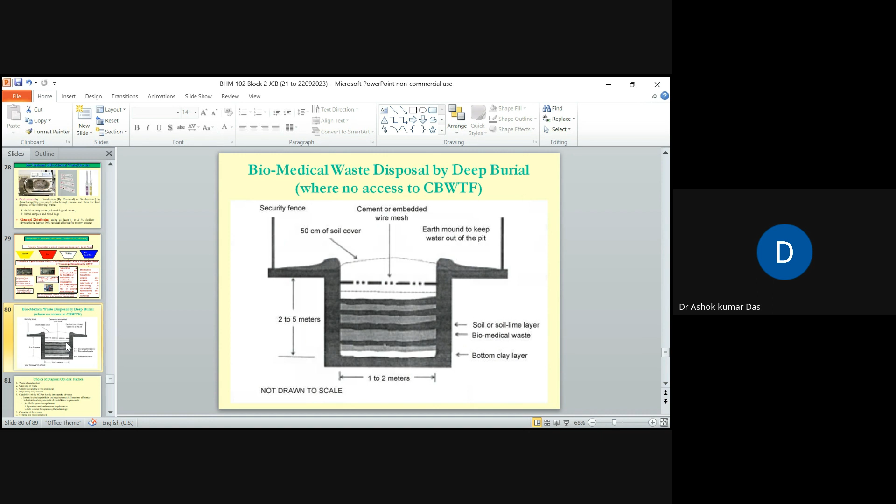We also have on-site disposal options. One option is deep burial. When can deep burial be allowed? Where the distance is more than 75 kilometers, or in a rural area with no access to a common facility, deep burial is allowed. Generally, in rural areas where there is no common facility, deep burial is allowed for hospitals.

A hospital cannot have an on-site treatment facility if there is a common facility within a distance of 75 kilometers. Within that distance, the hospital will not be allowed to have an on-site treatment facility; all the waste has to go to the common facility only. Where there is no common facility at all, the hospital will be allowed to have deep burial or autoclave for further treatment and disposal.

Choice of disposal options depends upon the waste characteristics, quantity of waste, options available for final disposal, regulatory requirements, and the capability of the healthcare facility to handle that quantity of waste. It includes technological options, capacity of the system, volume and mass reduction, environment and safety factors, and cost considerations. All of this is taken into account before the disposal option is decided.

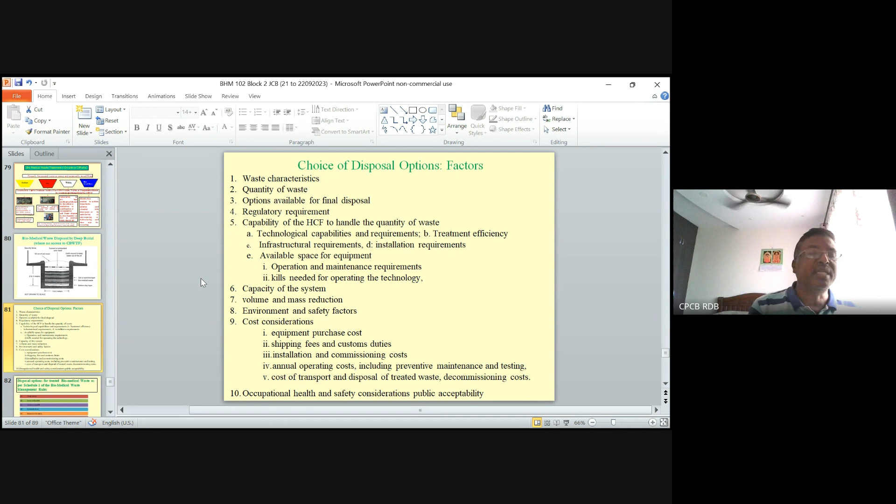What disposal options do we have? We have deep burial, secure landfill, sanitary landfill, encapsulation, resource recovery, pretreatment using neutralization, waste to energy and recovery of fuels or diesel fuels, road making or pavement, and use of waste as raw material by iron or foundry industry.

All treated waste will have these sort of options depending upon the type of waste and whether it is recyclable or not. If the waste is recyclable, that treated waste can go for recycling activity, which includes resource recovery, waste to energy or recovery for fuel or diesel oil, road making or pavement, or using stainless steel materials as raw material for iron and foundry industry.

Any waste with no more value will go to secure landfill facility, or if the treated waste is still dangerous in nature, it will go for encapsulation. What type of waste is dangerous even after treatment of biomedical waste? Waste sharps, for example — radioactive or waste sharps are generally dangerous even after treatment because they remain sharps, so that waste has to go for encapsulation only.

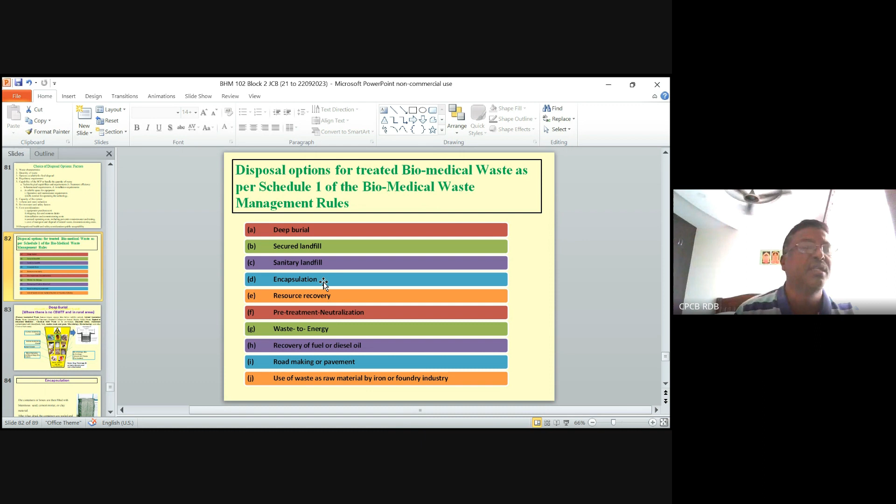Sir, please give some example of encapsulation. Yes, I'm showing you, I'm just coming, sir. Okay, this is what...

Encapsulation means putting the entire waste as part of a solid mass. In a drum, let us say, I kept all my waste—sharps, needles, everything. Then I mix cement slurry and pour it into this. It becomes a single mass encapsulation, meaning I cannot take out anything from here. It is embedded as part of the cement slurry, or saturated.

A simple example: any cement concrete pipe, a pipeline, you can close on one side and start filling from the other side. Once the pipe is filled up, you can seal the top other end. That is also called encapsulation, meaning you cannot go and take it out afterward.

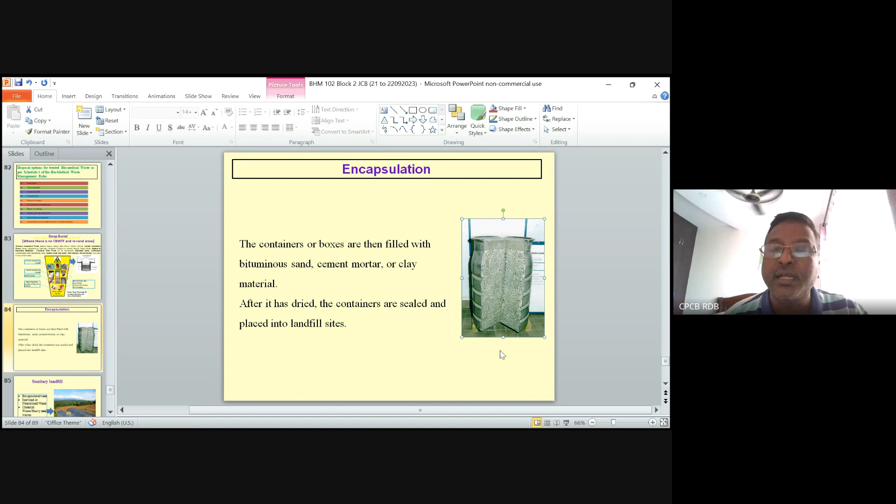Understood? Any doubt? No sir. Sir, this is a cut portion, just to show the example. Let me elaborate on how it looks.

Embedded—all the waste is inside, you cannot take it out, it is a slurry. It has taken the shape of the drum. Even if you cut the drum from outside, it will have the shape of the drum only, because it is cement concrete slurry.

For the pipeline also, you can take one pipe, fill it with all the waste sharps, and pour concrete from the top. Cover it—this becomes a solid mass. That is also encapsulation.

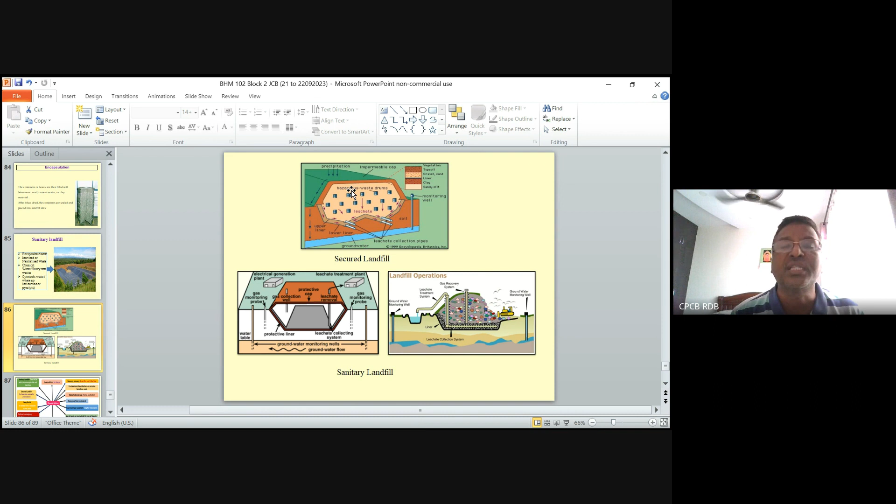These are the options we have. Encapsulation for sharps, but all the plastic waste can go for resource recovery. Pre-treatment, neutralized hazardous waste has to go for secure landfill. Plastic waste will go for waste-to-energy, recovery of fuels and so on—meaning plastic waste can go for recovery of fuel or diesel oil. Road making or pavement—slag also can go for road making. After incineration, whatever slag is generated from ash can go for road making, road filling, or low-lying area filling, and plastics can also be used for road making. Use of waste as raw material by iron ore—that means stainless steel, especially the white category waste. Treated waste can go for stainless steel, iron, or foundry industries.

Treatment and disposal options for pharmaceutical waste are encapsulation, incineration, pyrolysis, or returning to the manufacturers. Pharmaceutical waste can be returned to the distributor or manufacturer, or you can go for encapsulation, or treat that waste by incineration.

Let us come back to the options for emergency situations: waste pit. In case of emergency, you can go for a waste pit as final disposal of waste. In case of sharps, you can use sharp pits, and ash pit can be used for disposal of ash. Deep burial, where there is no crematory or access to one, can be adopted. Where hazardous waste can be disposed of is the secure landfill.

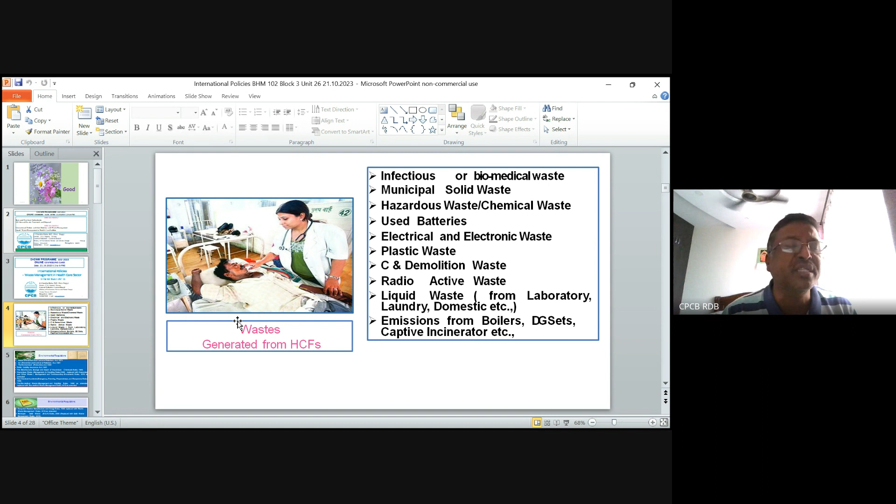Already rules are there for management of different types of waste in accordance with various rules notified in the EPA Act. Now, if waste is not properly managed, you have seen what type of toxic gases will be emitted, including dioxins, furans, and mercury emissions. We call it persistent organic pollutant - meaning once it is in the environment, it will not go away, it will be there for a longer time, and it will transport for far distances.

You may be emitting in, say, Bengaluru, but that effect may be somewhere in Europe. When you discharge any emissions, the effect may be somewhere else - that is called persistent organic pollutants. If you don't take proper measures for management of waste or control of emissions, it may cause climate change, biodiversity loss, deforestation, marine degradation, and expanding trade and consumption. These are the problems associated with large global environmental change.

Now, in order to avoid these problems spreading from one country to other, various international policies have been framed, which have been agreed by most of the countries in the world. What are they?

There's the Montreal Protocol, Basel Convention, which controls transboundary movement of hazardous waste from one country to another, and Stockholm Convention on persistent organic pollutants - pollutants that remain in the environment for a longer time and cannot be converted into other forms. There's also the Minamata Convention. These are the four conventions referred to in the IGNOU course, so we will confine ourselves to these four international conventions only, not all.

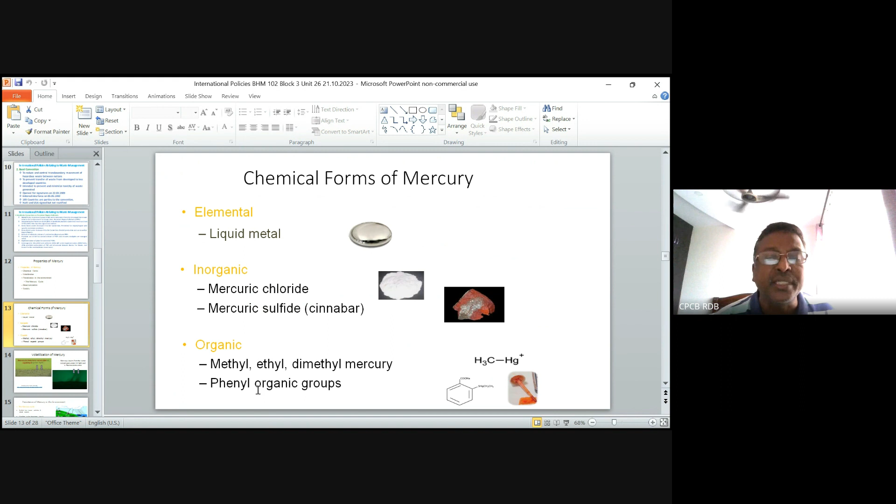Mercury is the only metal available in liquid form, and the most contaminated form of mercury is methyl mercury. Methyl mercury is a highly toxic constituent, and once it undergoes volatilization, it comes back to the environment, polluting both soil and water bodies, because mercury remains in vapor form in the atmosphere, and when it comes through precipitation it reaches water bodies and causes impact, also entering the food chain. It may contaminate fish where mercury content is higher, and then it reaches different places.

This is how mercury comes back to the environment and water bodies. If you take water, it comes into the fish chain, the food chain. Therefore, mercury causes a lot of impact and is a very dangerous element. We have already discussed how to collect mercury spills, so I'm not going to discuss that again.

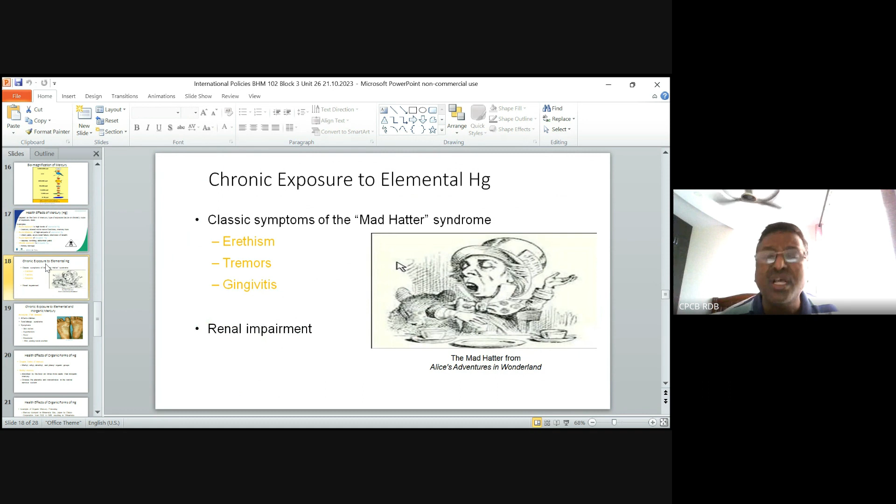It is a globally negotiated international treaty that addresses global mercury pollution and its serious health damage, adopted and opened for signature on 10th October 2013 and entered into force on 16th August 2017. Recently, only in 2017, it came into force.

It was signed by 144 countries and ratified by more than 88 countries. India signed on 30th September 2014 and ratified in 2018, meaning we agreed for implementation from that date onwards.

The convention calls for phase out of mercury, ban on mercury mines and phase out of existing ones, phase out of mercury use in a number of processes, control measures to release on environment, waste interim storage and its safe disposal, and it addresses sites contaminated with mercury and health issues.

As part of the Minamata Convention, mercury has also been included as part of norms for biomedical waste incinerators. The limit for incineration mercury emission component is 0.05 milligram per normal meter cube.

Because we have signed, ratified and agreed to implement these actions under the convention, the limits have been prescribed. You all know where mercury is used, in thermometers, in hospitals. This we have already discussed, including how to collect everything.

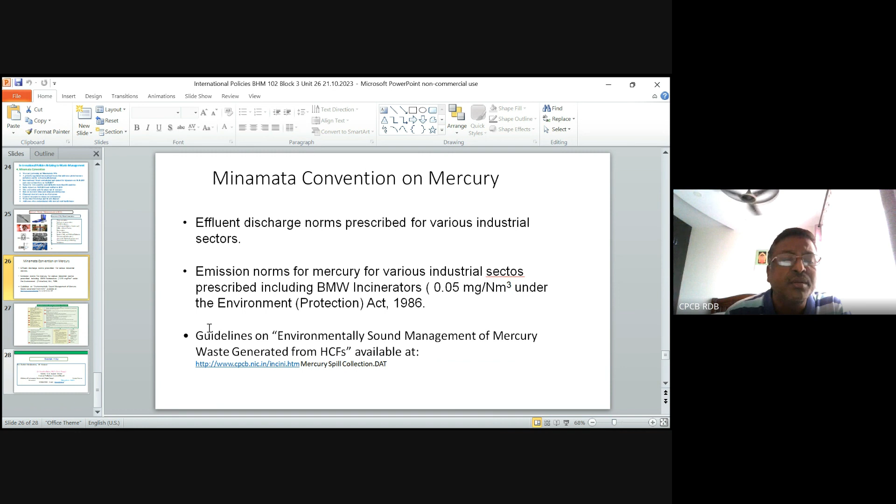Therefore, for biomedical waste incinerators and other waste incinerators, mercury emission norms have been prescribed at 0.05 milligram per normal meter cube for mercury and its compounds. Guidelines are also given by CPCB for management of mercury waste in healthcare facilities.

These are the gist of the conventions, which I already discussed regarding the international conventions. Mercury is linked to healthcare waste because it is part of the Minamata Convention, and we have suggested various measures.

Hazardous waste is also generated by hospitals. Hazardous waste protocols have to be implemented by healthcare facilities, which includes e-waste, lead-acid batteries, and pharmaceutical waste, which is also hazardous waste. All hazardous waste generated has to be discharged or disposed of in accordance with the respective rules only.

Lead-acid batteries generated have to be disposed of in accordance with the Battery Waste Management and Handling Rules. Because we are party to various international conventions and due to commitments made by the Government of India, various provisions were included wherever required. That is the purpose of having these international treaties.

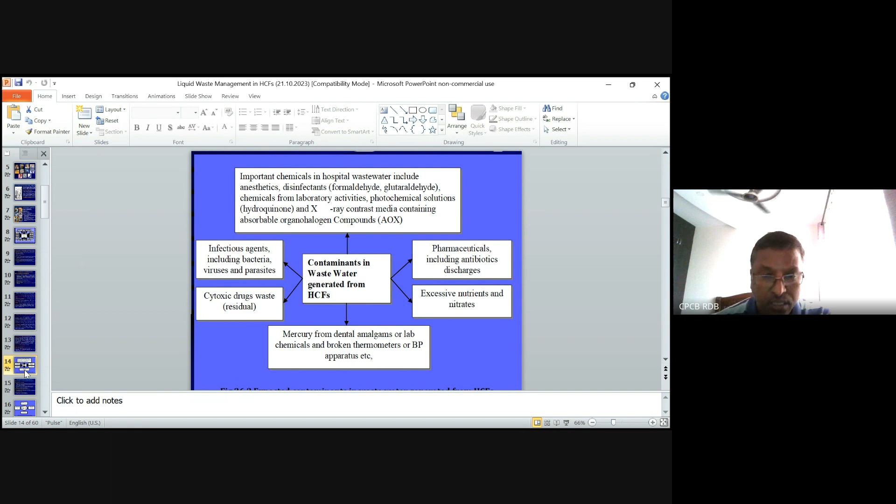Mercury from dental amalgam or lab chemicals, if not properly collected; if there are broken thermometers or BP apparatus not collected properly, then mercury becomes a part of wastewater. Excessive nutrients and nitrates will be there from the urinals or bathroom areas. Pharmaceuticals, including antibiotics, etc., are also discharged as part of the wastewater.

Therefore, wastewater generated from the hospitals needs to be treated definitely. Otherwise, it is going to cause environmental implications.

What will happen if untreated wastewater is discharged into the drains? It is going to reach the water bodies, and when untreated wastewater goes to water bodies with excessive nutrients, eutrophication of lakes takes place, algal blooms will occur, biotoxins will accumulate in the water bodies, and depletion of oxygen level will take place.

If there is no oxygen content in the water body, what will happen? If there is fish, and oxygen levels are low, then fish kill will occur in the water bodies, due to depletion of oxygen levels or accumulation of nutrients. Generally, the depletion of oxygen level always causes these problems, and fish kill will result.

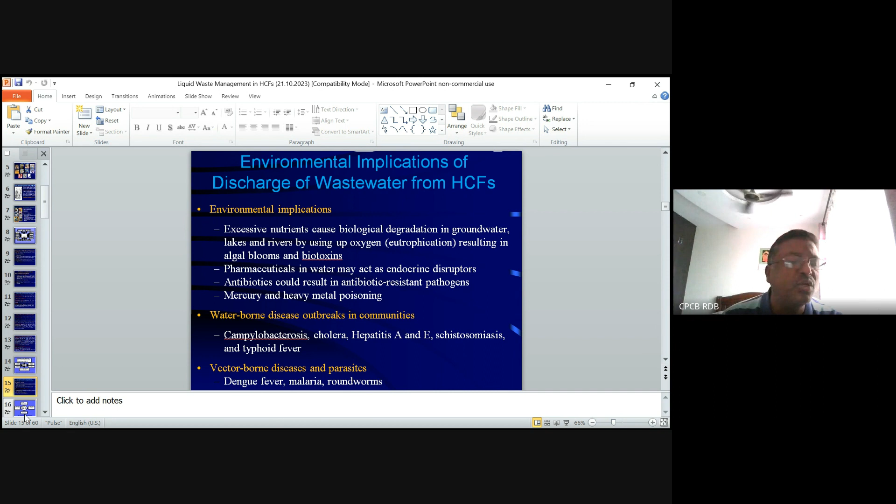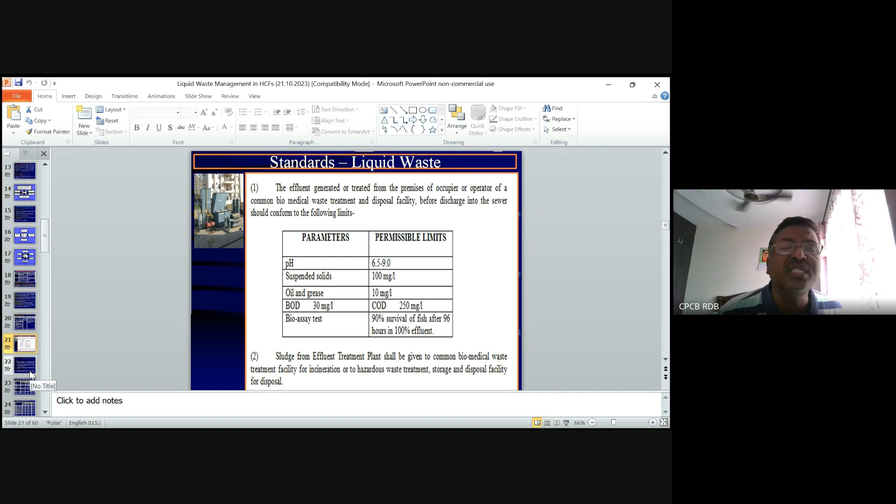Of course, these are the norms. You have to check under EP6, Schedule 6 of the EP rules. Of course, these are the limits.

What will be the problem? If there is direct disposal, no investment or maintenance cost is there, but it is going to cause problems to the water bodies. It is going to cause harmful effects. Harmful bacteria will be there. Therefore, it may cause an epidemic if wastewater generated from the hospital is discharged directly.

Co-treatment in municipal wastewater means no direct discharge to the environment, so some things can be treated and ensured. With on-site wastewater treatment, at least you can reduce 90% of the pollution load onto the water bodies. If you treat on-site within the hospital, you can reduce 90% of the load on the water bodies.

Definitely there will not be any problem. On-site plus municipal treatment means, cost-wise, you can think of this option.

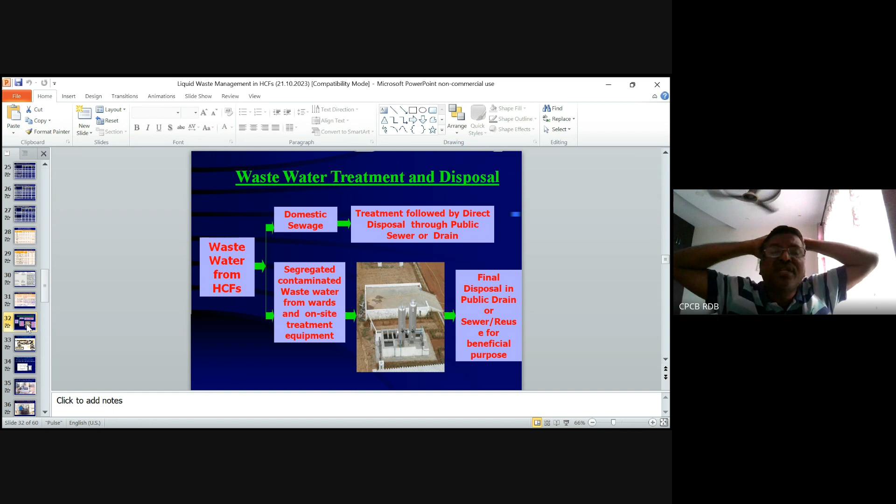How to discharge? The wastewater has to be segregated, like domestic sewage versus hospital wastewater contaminated with infectious waste. Domestic sewage can be discharged using minimum measures like septic tanks or soak pits, whereas effluent contaminated with infectious waste has to be treated definitely, using different treatment plants.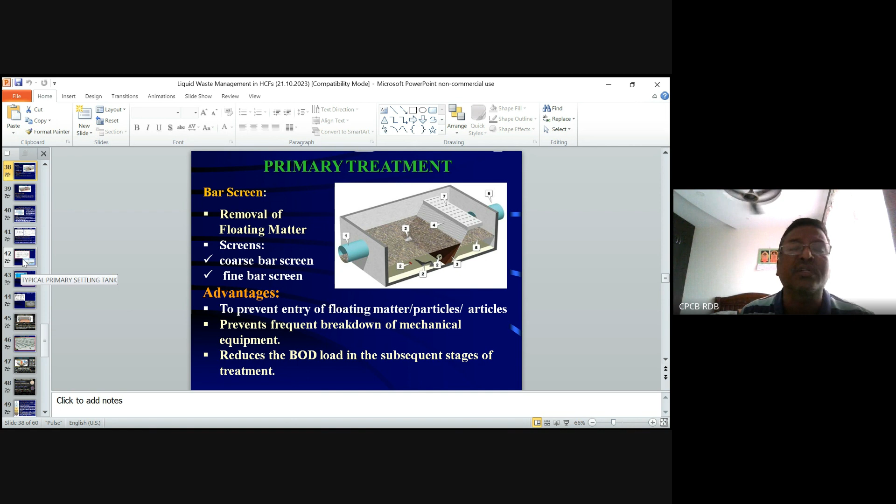Then this is the equalization tank. Wastewater generation from the hospital from different sources is not uniform—it may come at different times or in varying quantities. Therefore, all the wastewater is collected here and mixed thoroughly so it has a uniform nature, and a uniform flow is ensured through the outlet so it doesn't affect the next treatment unit.

Next is chemical dosage. Chemicals are fed here, generally ferric chloride and alum. The wastewater is then mixed thoroughly through flash mixing, followed by slow mixing tanks where the mixing is done very slowly so that the solids present start coming closer together.

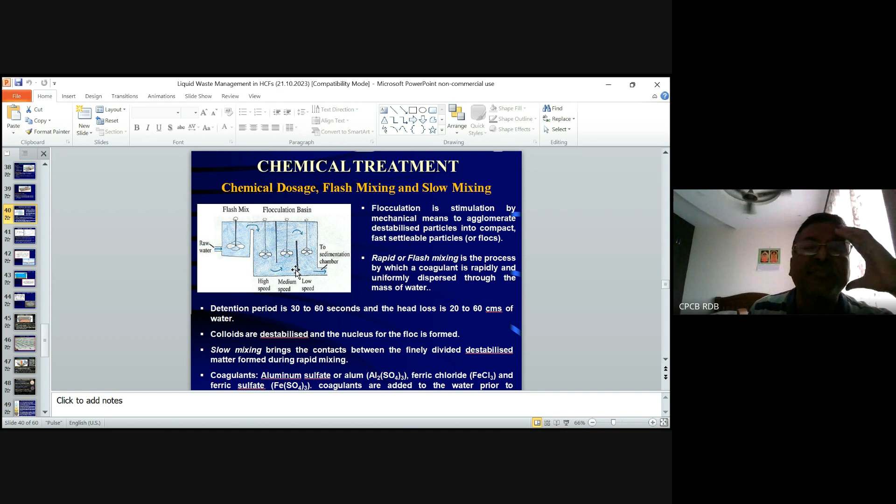They become like flocs. These flocs form because of the addition of coagulants during slow mixing. The solids which are in dispersed form always come closer and closer together.

When going for slow mixing, these particles come closer and closer and their size increases so they can settle down on their own by gravity. Therefore, coagulants are used to make dispersed particles come closer together, forming bigger particles that can settle on their own by gravity.

How it happens, let us see. This settlement takes place in the next tank, called the primary settling tank. Initially the particles are dispersed, but after adding coagulants, they come closer together, and eventually they become a floc able to settle on its own.

In the settling tank, the velocity of flow is maintained such that by the time the water travels from inlet to outlet, the particles fall by means of gravity. The velocity is maintained so that the solid flocs formed in the slow mixing tank settle on their own in this tank, allowing the solids to be removed.

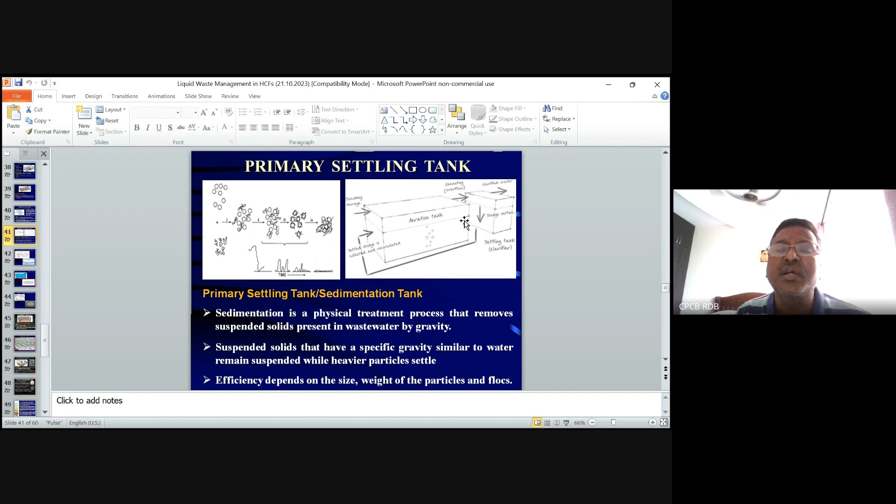This is what the purpose is. Next, there are different types of tanks where the velocity of flow is maintained, such as circular tanks, or rectangular and horizontal tanks.

Now, the secondary tank's purpose is that we use diffused aeration in such a way that biological activity takes place. We try to add urea, cow dung and so on, and ensure biological activity takes place and uniform conditions are maintained. Then whatever the BOD and organic matter is there, that is consumed, and cells die. This biological activity is also a continuous process.

The bacteria will be dying and growing because of the availability of nutrients. Therefore, in order to maintain the biological activity here, adequate air supply is maintained. Air is supplied to have the biological activity thoroughly. Aerobic conditions will be there, and whatever organic matter is converted into harmless compounds by the bacterial activity.

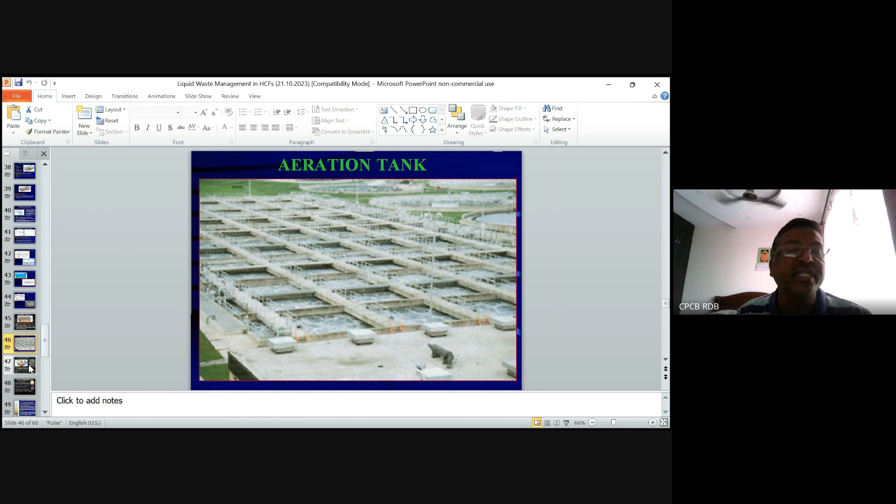Dead cells will be there, dead activity cells also will be there, dead bacteria will be there, and solids will form. Therefore, the next stage is the aeration process, where they maintain the adequate quantum of oxygen in the tanks. Next is the secondary settling tank, where the dead cells, which have their own gravity...

The velocity is maintained in such a way that the dead cells, having specific gravity higher than water, settle to the bottom, and all the sludge is collected from the bottom, as I showed already in the earlier slide.

Then after the settling tanks, the treated water will go for filtration using pressure sand filters and activated carbon filters. All the wastewater is treated properly. Whatever solids are there in dissolved form will be removed in this filtration stage.

Earlier, the bar screen removes whatever particles are there in floating condition, whereas in settling tanks, the solids having specific gravity more than water, which are suspended solids, are removed in the first primary settling tank.

Then in the secondary stage, whatever solids are there in colloidal and dissolved form are removed by the bacterial activity, the biological process. In the third stage, all the dead cells and the flocs formed because of the biological activity will be settled.

Therefore, afterwards, any solids or toxic constituents in dissolved form in the water will be removed in the filtration process and activated carbon process.

Of course, this is the filter process. I'm not going to explain it thoroughly, it's not required. You would have seen simple filters, and you may be knowing all these things already.

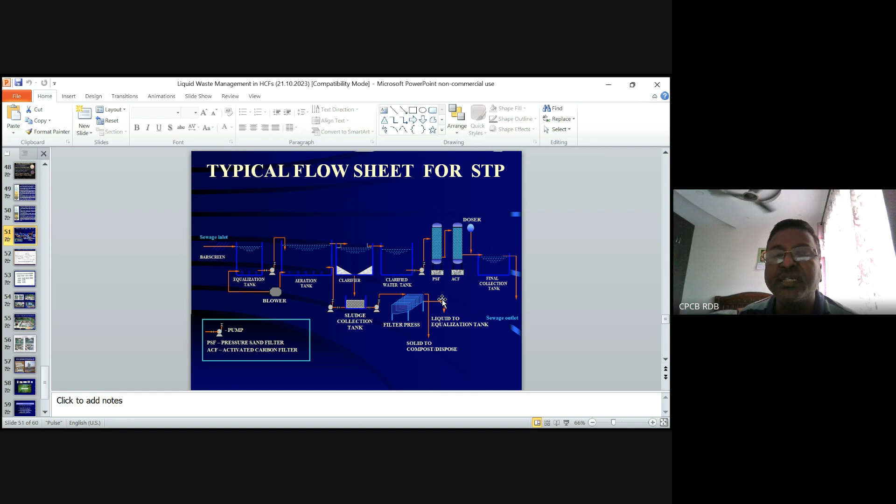The sludge generated will go for a sludge drying bed, and through a filter press or a sludge drying drum, where moisture is removed. Sludge can be sent to the sludge drying bed. After drying, that waste can be disposed of as solid waste, or it can be used as manure.

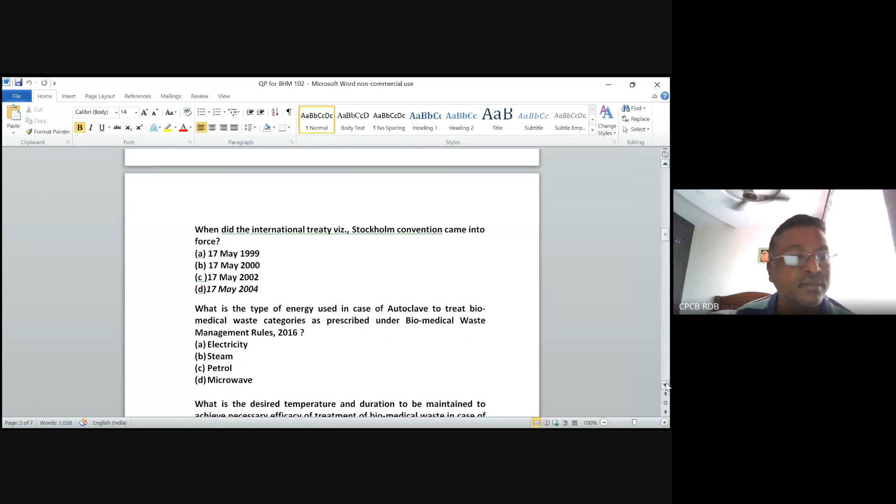When did this international treaty, Stockholm Convention, come into force? Anybody can guess? 17 May 2004.

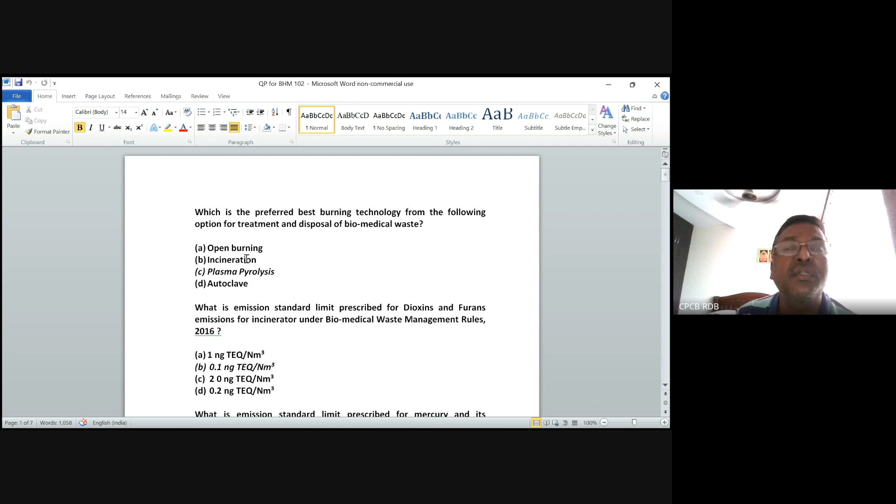In autoclave, what type of energy is used for treatment of biomedical waste? Steam. Correct, steam is used as a heat source to treat the waste.

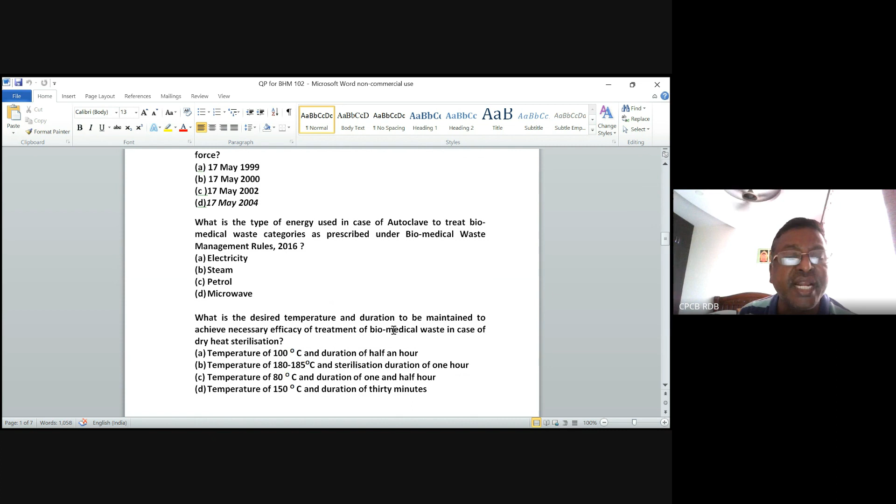What is the desired temperature and duration to be maintained to achieve necessary efficacy of treatment of biomedical waste in case of dry heat sterilization? 180 to 185 degrees Celsius, and the duration is 1 hour.

What is the device used for conversion of electrical energy into microwave energy? There is one equipment called magnetron that converts electrical energy into microwave energy in case of microwave treatment.

What type of waste cannot be treated using microwave? Anybody can guess? Radiological and mercury waste cannot be treated.

What type of biomedical waste at source of generation is treated using the equipment called demolizer? I'm sorry, this I have not discussed. There used to be, in olden days, one demolizer - it is like an autoclave only. In order to treat small amounts of sharps waste, that demolizer used to be used. It is a small equipment which in earlier days was used for treatment of small amounts of sharps waste within the hospitals.

Under what circumstances is biomedical waste allowed to be disposed of by deep burial? Where common treatment facility is not available. Fantastic.

What should be the thickness of HDPE liner used as a base liner to avoid groundwater contamination in secure landfill facility? 1.5 mm HDPE.

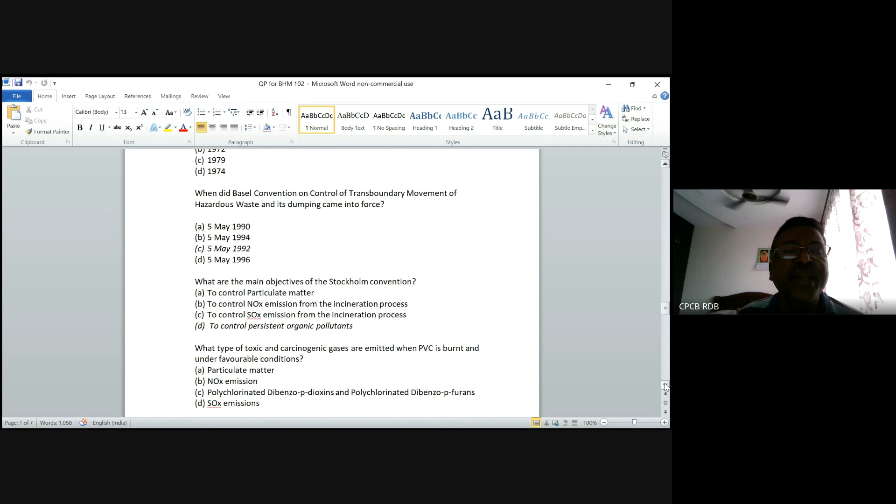When did Basel Convention on control of transboundary movement of hazardous waste and its dumping come into force? 5th May 1992.

What are the main objectives of Stockholm Convention? To control persistent organic pollutants.

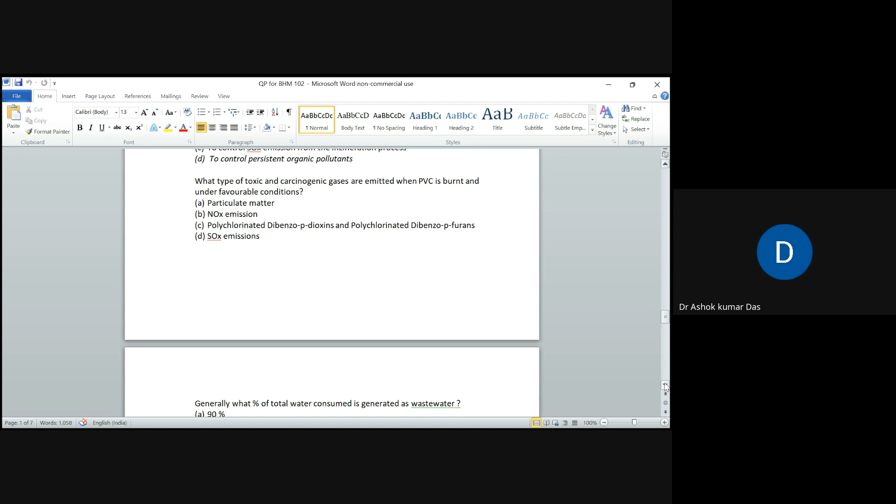What toxic and carcinogenic gases are emitted when PVC is burnt under favorable conditions? Polychlorinated dibenzo-p-dioxins and furans are emitted.

Generally, what percentage of total water consumed is generated as wastewater? 80 to 85%.

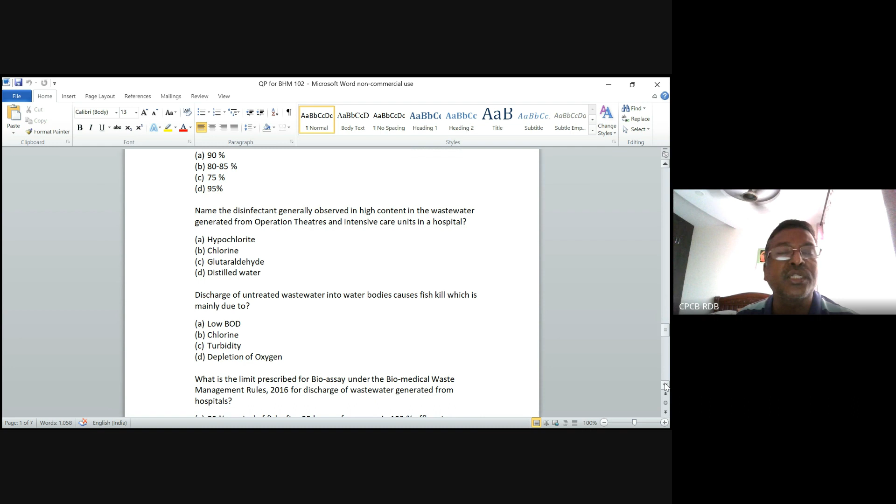Name the disinfectant generally observed in high content in the wastewater generated from operation theaters. Glutaraldehyde, sir, acting as a chemical disinfectant.

Discharge of untreated wastewater into water bodies causes fish kill which is mainly due to what? Depletion of oxygen - because of depletion of oxygen only the fish kill occurs.

What is the limit prescribed for bioassay under the biomedical rules for discharge of wastewater generated from hospitals?

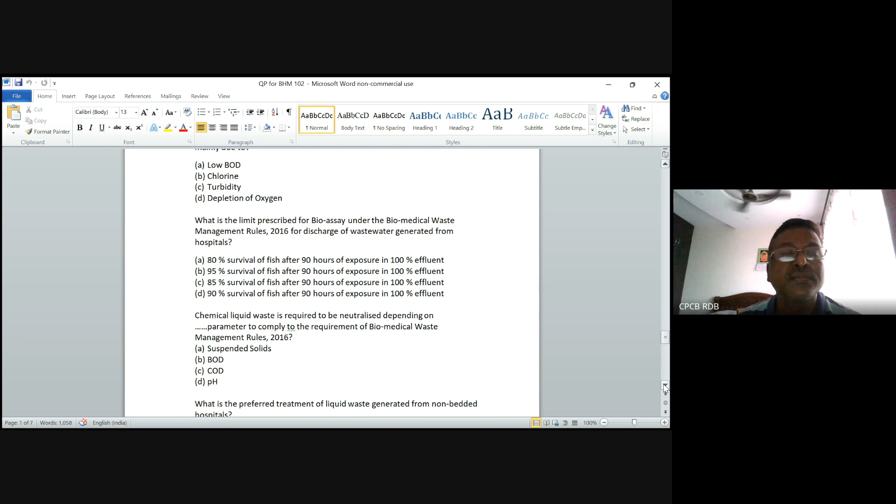90% survival of fish after 96 hours of exposure in 100% effluent. Chemical liquid waste is required to be neutralized depending on pH parameter.

What is the preferred treatment of liquid waste generated from non-bedded hospitals? As I showed you in one example, 1 to 2% sodium hypochlorite is used where non-bedded hospitals are concerned. Otherwise, you have to go for a full-fledged wastewater treatment plant.